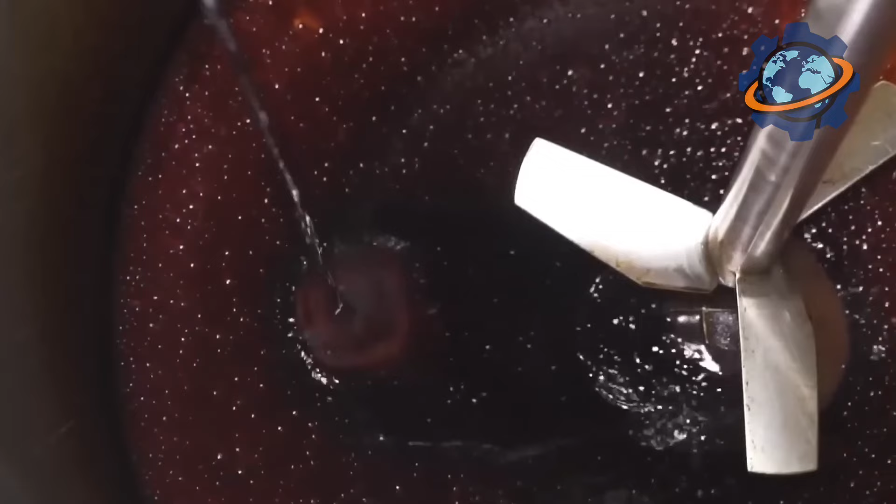For sweetness, Coca-Cola uses either high fructose corn syrup or cane sugar, depending on the region of production. In the United States, such syrup is predominantly used due to its availability and cost, while in many other countries, natural sugar from sugarcane is used. These two sweeteners have slightly different taste profiles, which affects the subtle nuances of the drink's flavor, but both provide the same sweetness that millions recognize and love.

The color of the drink is created using caramel color, which gives Coca-Cola a deep, dark brown hue. This coloring is produced using a special technology that ensures color stability and does not alter the taste properties. The tartness of the drink is provided by phosphoric acid, which also enhances the refreshing effect and gives the drink its characteristic light tang. Caffeine is another important ingredient that adds a slight bitterness and a stimulating effect to the drink.

The most mysterious component is the natural flavors, which contain a secret recipe known only to a select few company employees. This mixture of essential oils, extracts, and spices creates the recognizable aroma and taste of Coca-Cola, which is impossible to replicate exactly. It is known that the composition may include oils of lemon, orange, cinnamon, nutmeg, and other ingredients, but the exact recipe remains a trade secret.

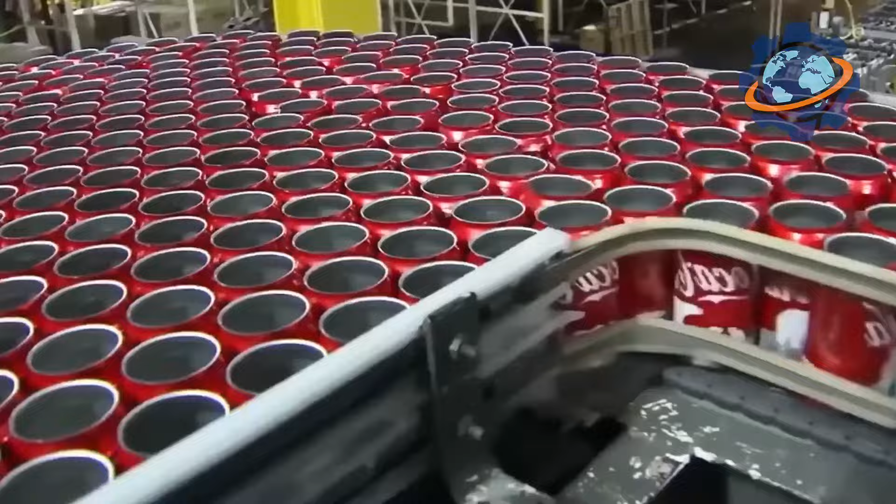In some versions of Coca-Cola, such as Coca-Cola Zero Sugar or Diet Coke, artificial sweeteners like aspartame and acesulfame potassium are used instead of sugar, which allows for reducing the calorie content of the drink without losing its taste qualities. These versions are aimed at consumers who want to reduce their sugar intake but do not want to give up their favorite taste.

Thus, the uniqueness of Coca-Cola lies in the combination of simple but carefully selected ingredients, which together create a unique taste and aroma. Each component performs its role, from refreshing carbonation to sweetness, color, acidity, and subtle aromatic notes that make this drink legendary and recognizable all over the world.

The production process of Coca-Cola is a true high-tech dance in which every step is performed with precision and care to create the legendary drink that is known and loved all over the world. Let's imagine we've entered a modern factory where the magic begins. It all starts with water, the main ingredient of the drink. Water comes from special sources and undergoes multi-stage purification.

First, it is filtered through sand, carbon, and ultrafiltration systems to remove any impurities, bacteria, and unwanted substances. Then the water is treated with ozone or ultraviolet light for additional sterilization. The result is absolutely pure, crystal clear water that meets strict international quality and safety standards.

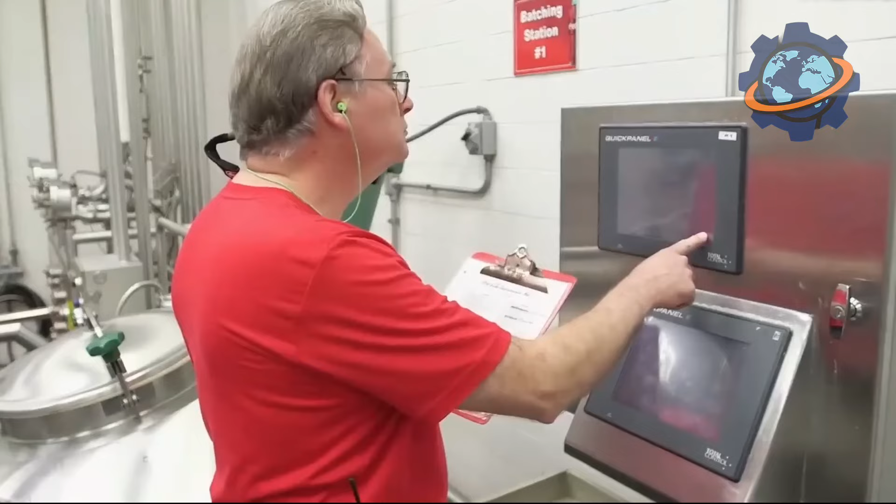In parallel, a sugar syrup is prepared. For this, sugar is dissolved in purified water in special tanks. This process takes place at a strictly controlled temperature to ensure the sugar dissolves completely and the syrup becomes homogeneous. The water for the syrup also undergoes filtration to avoid any impurities.

The next key stage is mixing the syrup with a concentrate of aromatic substances, which contains the secret Coca-Cola recipe. This mixture is added in special proportions to create the characteristic taste and aroma of the drink. The result of this stage is the so-called blending syrup, the basis of the future Coca-Cola.

Then the blending syrup is mixed with purified water and carbon dioxide in large mixing tanks. Carbon dioxide gives the drink its refreshing fizziness and a light tingling sensation that is so appreciated by consumers. The entire process takes place under strict control of pressure and temperature to ensure the ideal concentration of gas and uniform saturation of the drink.

In parallel, packaging is prepared at the factory. Empty glass or plastic bottles, as well as metal cans, undergo thorough cleaning and sterilization. The bottles are washed in special machines where water under high pressure and temperature removes any contaminants. Then they are dried and prepared for filling.

After this, the main conveyor process begins. Bottles move along belts at a speed of hundreds per minute. They are automatically filled with the finished carbonated drink through special dispensers that accurately measure the volume of each portion. After filling, the bottles are quickly sealed with caps or lids to preserve freshness and carbonation.

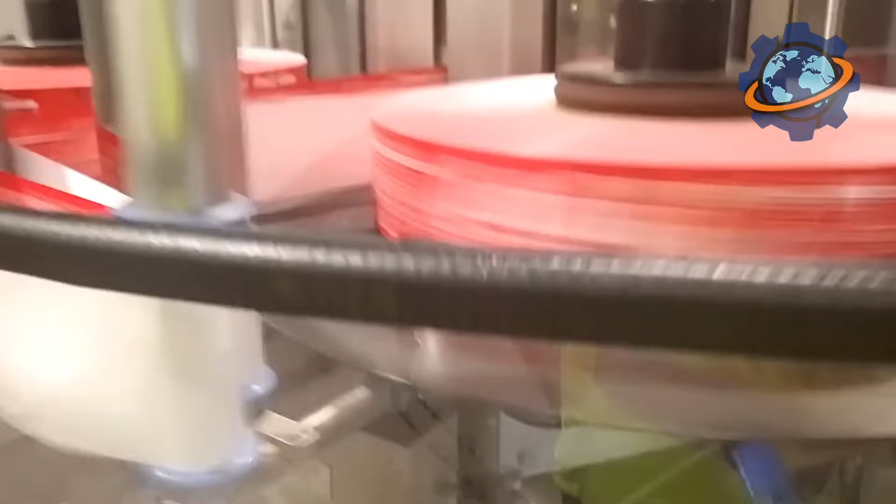Next, the bottles pass through a quality control zone, where special sensors check the fill level, seal, and absence of defects. If any deviations are detected, the bottles are automatically rejected. After this, the filled and sealed bottles move to the labeling stage. Labels with the logo, information about the composition, and expiration date are applied to them. Then the bottles are packed into cardboard boxes or plastic crates, which are convenient for transportation and storage.

The packaged products are sent to the finished goods warehouse, from where they are distributed to stores all over the world. The entire production process is accompanied by constant monitoring and quality control. The factory has numerous sensors and computer systems that track temperature, pressure, carbon dioxide concentration, equipment cleanliness, and compliance with safety standards. This ensures that every bottle of Coca-Cola meets high requirements and provides consumers with a consistently pleasant taste.

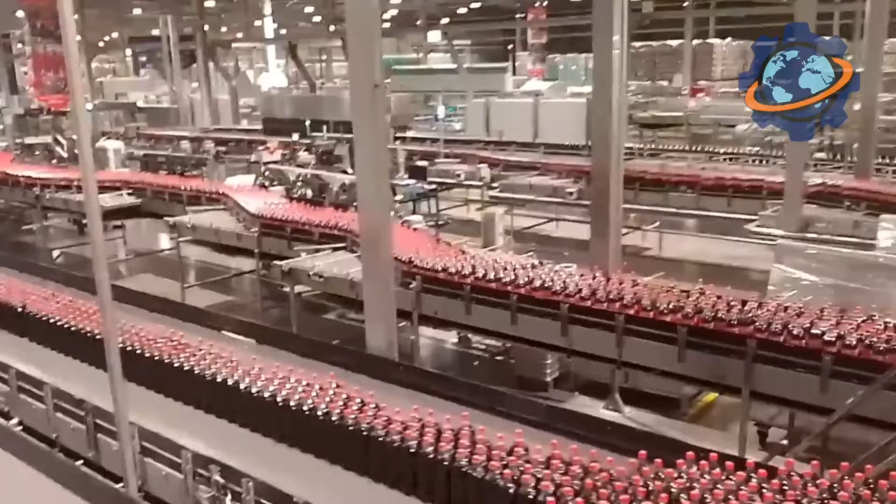So, the production of Coca-Cola is a complex and coordinated work of a large team and modern equipment, where water, sugar, a secret concentrate, and carbon dioxide are transformed into a legendary drink. Bottles and cans, as if on a magical conveyor, go through all stages from cleaning to sealing, to ultimately end up in your hands, with a fresh, sparkling, familiar taste that has been bringing joy to millions of people around the world for over a century.

In the first quarter of 2025, the Coca-Cola Company reported a net revenue of approximately $11,113 million, which is 2% less than in the same period last year. This decline was due to currency fluctuations and changes in the structure of franchising operations. At the same time, organic revenue, which takes into account internal growth without the influence of external factors, increased by 6%, indicating a successful pricing policy and a recovery in sales volumes in key regions, such as the Asia-Pacific region.

The volume of sales in the form of product units increased by 2%, which is the best indicator since the second quarter of 2024, thanks to growing demand in India, China, and Brazil. Coca-Cola remains one of the strongest global brands with a recognition index of over 90 points, ranking among the top 10 global brands in terms of value and influence. The company is actively developing markets in countries with rapid economic growth, such as India, China, and Brazil, where the demand for soft drinks is growing due to the increase in the middle class and changing consumer habits.

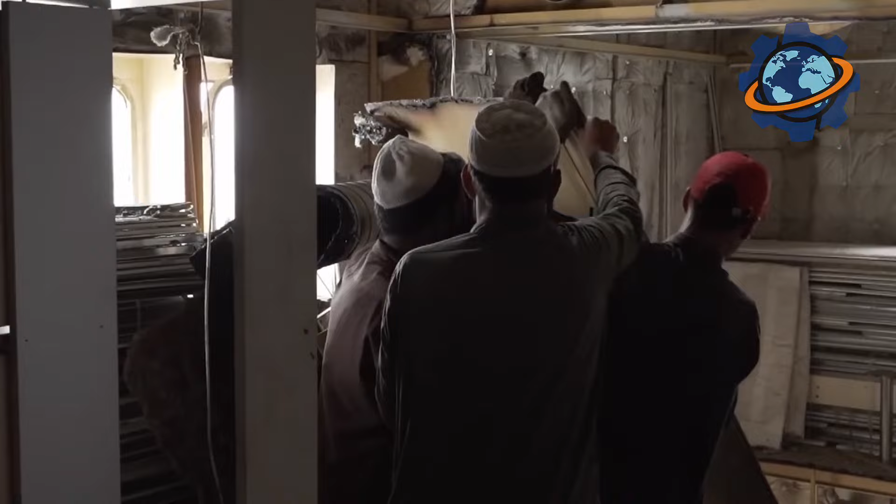Hazardous materials require special handling. Asbestos insulation wrapped every pipe in ships built before 1990. Workers in basic masks, far below Western safety standards, remove it by hand. Oil residue coats engine rooms inches thick. Fuel tanks supposedly emptied still contain deadly vapors. Last year, 17 workers died in Bangladesh yards from explosions and toxic exposure. This is dangerous work done by desperate men.

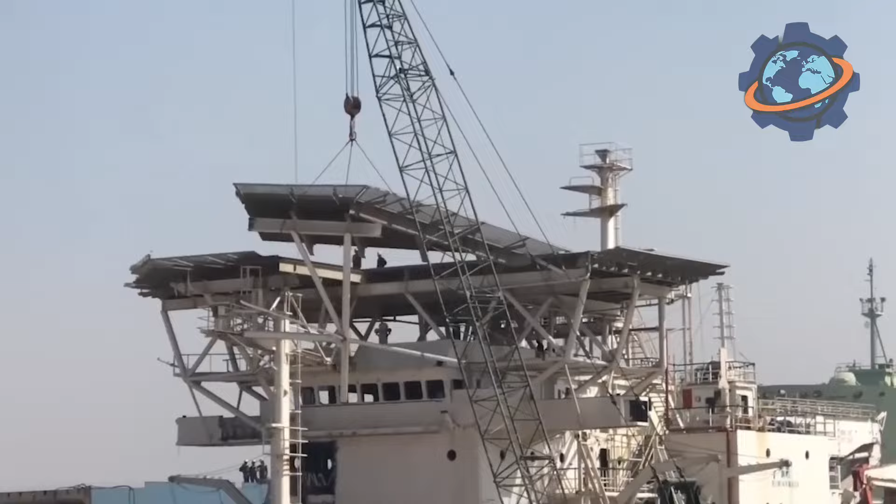The cutting begins at the bow. Workers climb scaffolding made from ship parts, wielding oxyacetylene torches, burning at 6,000 degrees. Steel glows cherry red, then separates. Chunks weighing tons crash onto beach sand, shaking ground felt hundreds of yards away.

Watch the cutter teams. They work in pairs. One torches, one watches for falling debris. No hard hats. Flip-flops instead of steel-toed boots. Yet their precision is remarkable. They know exactly where to cut, following structural blueprints memorized through years of experience. The ship tells you where it wants to break, says one veteran. Fight it, the steel wins. Work with it, you go home alive.

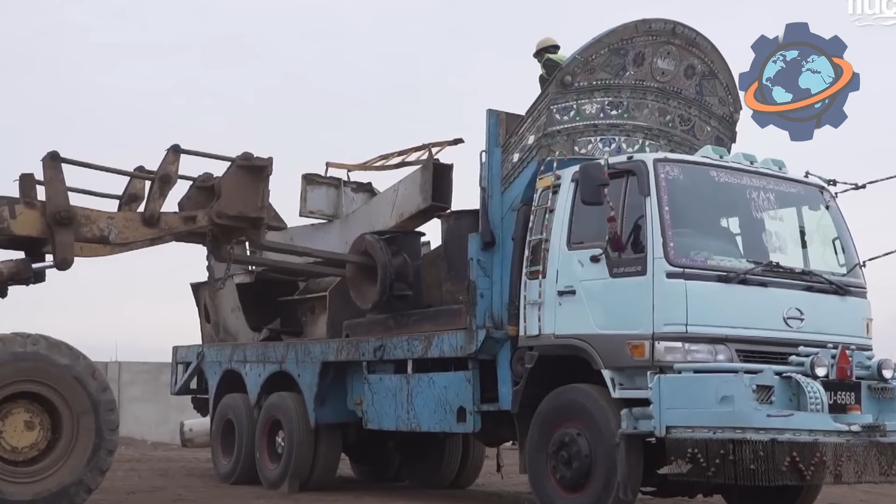Picture the economics. A scrapped container ship sells for $500 per ton. 60,000 tons equals $30 million, split between ship owner, yard owner, and workers earning $3 daily. The math seems cruel, but it's why these yards exist. No Western facility can compete with labor costs. Environmental regulations alone would triple expenses.

The engine room reveals industrial archaeology. Marine diesels the size of houses, 12 cylinders, each taller than a man, get disassembled bolt by bolt. These engines ran continuously for 30 years, burning heavy fuel oil thicker than honey. The engineering is magnificent. Crankshafts weighing 50 tons, precisely balanced to spin at 100 RPM without vibration.

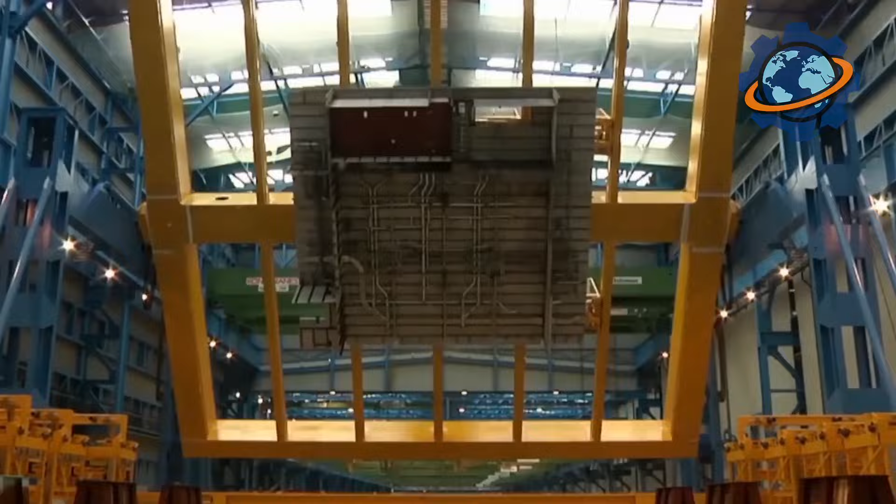This machinery doesn't get melted. It gets resold. Ship engines power factories across South Asia. Generators light villages without grid connections. Pumps irrigate farms. The secondary market for marine equipment employs thousands of traders, mechanics, and transporters. Nothing from a ship truly dies. It migrates into developing economies, extending useful life decades beyond original purpose.

Below the waterline lies the double bottom, the ship's structural spine. These compartments held ballast water, fuel reserves, sometimes cargo. Accessing them requires cutting through multiple steel layers, descending into spaces never designed for human comfort. Workers joke darkly about the belly, where heat concentrates, air thins, and escape routes disappear.

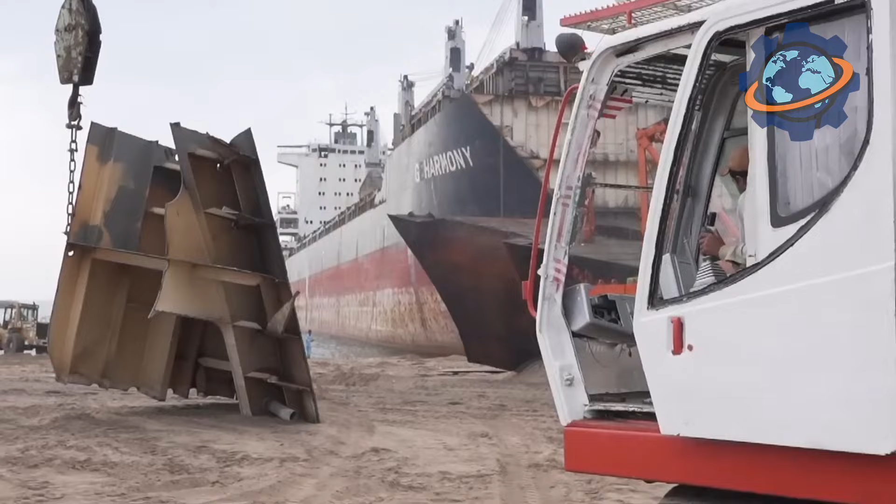Cutting the double bottom takes weeks. Each section weighs tons, but must be removed carefully. Collapse here buries workers under steel avalanches. Supervisors watch from shore, tracking progress through radio calls. When sections finally break free, cranes swing them clear while workers scatter. The beach cheers each successful lift. These small victories accumulate into complete demolition over months.

The propeller comes last and commands highest prices. Bronze propellers weighing 40 tons contain copper, aluminum, nickel, and manganese in precise alloy. Scrap value exceeds $200,000. Yards guard propellers like treasure, storing them in secured compounds until specialty metal dealers arrive.

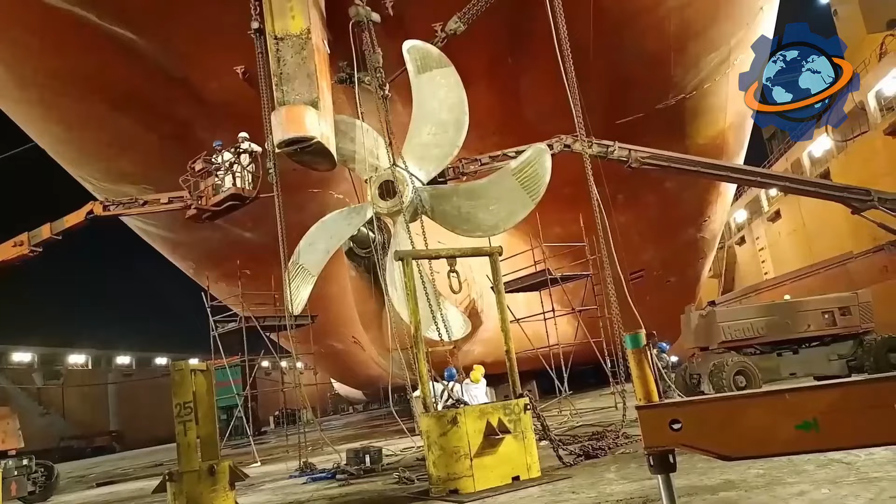Watch the propeller removal. It requires precision cutting around the shaft, then carefully lowering the massive bronze flower onto reinforced trailers. One slip damages blades worth thousands each. The journey from beach to foundry happens under armed guard. Bronze theft funds criminal operations throughout the region. When finally melted, this propeller might become electrical wiring, plumbing fixtures, or musical instruments. The ship's heartbeat transforms into civilization's nervous system.

Shipbreaking emerged from necessity after World War II. Hundreds of Liberty ships, hastily built for wartime cargo, became obsolete overnight. Scrapping them created the modern industry. Taiwan dominated through the 70s, then Korea, then China. Environmental regulations pushed the trade to South Asia by the 90s.

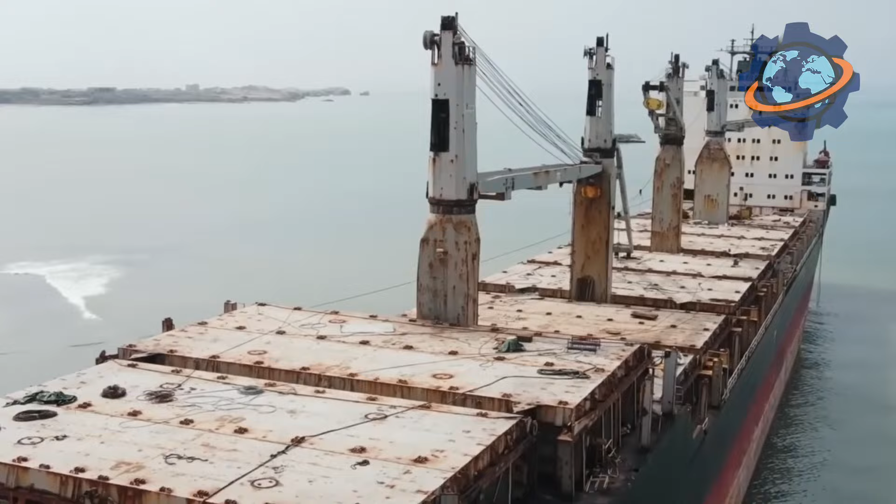Chittagong rose because geography cooperated. Extreme tidal ranges, 16 feet between high and low, create natural dry docks. Sandy beaches cushion impacts. Cheap labor, minimal regulation, and proximity to steel-hungry construction markets completed the equation. Today, Bangladesh breaks 40% of global tonnage. The industry employs over 200,000 workers directly, plus countless more in supporting trades. Love it or hate it, shipbreaking built modern Bangladesh.

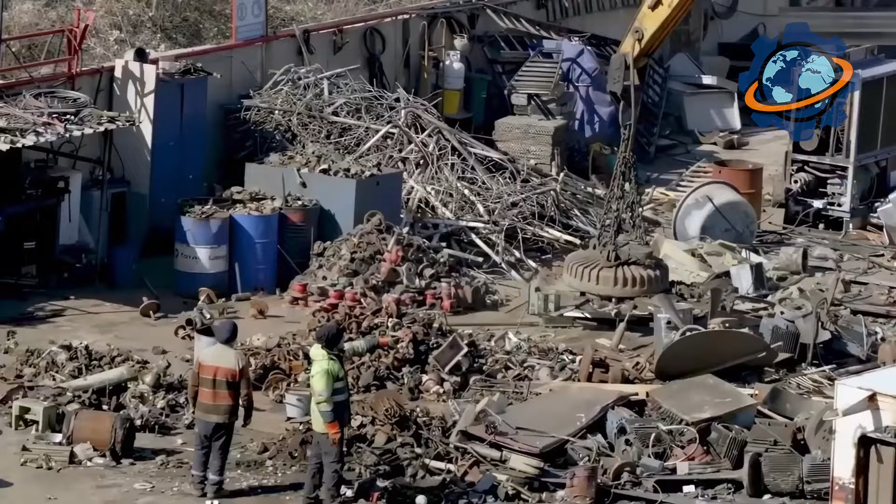Carbon emissions dropped 62% using ship-sourced steel versus virgin ore production. Industry recycles 20 million tons of steel annually, enough to build 4,000 skyscrapers. A single aircraft carrier yields enough metal for 15 apartment towers housing 50,000 people. Here's the secret we promised. That ship doesn't just get recycled, it gets reincarnated completely. 95% of every vessel finds new life.

Steel becomes rebar reinforcing buildings throughout Asia. Copper wiring powers homes. Furniture furnishes restaurants. Lifeboats become fishing vessels. Even the wooden decking becomes flooring in European boutiques, marketed as reclaimed teak at premium prices. From ocean voyager to urban infrastructure, the transformation completes. We've built an ecosystem where nothing truly disappears.

That cruise ship where honeymooners danced might now support the hospital where their grandchildren are born. The container ship carrying your television might become the bridge you drive across. Ships don't die on those beaches. They scatter into civilization, becoming the hidden skeleton of modern life. Steel ghosts supporting everything we build.

Every second, 32 tires begin service worldwide. Each survives 100,000 miles of punishment, heat, friction, road impacts before replacement. Picture mountains of rubber growing daily. 2 billion tires manufactured annually, weighing 25 million tons combined. That's every car, truck, aircraft, and bicycle on Earth demanding fresh rubber constantly.

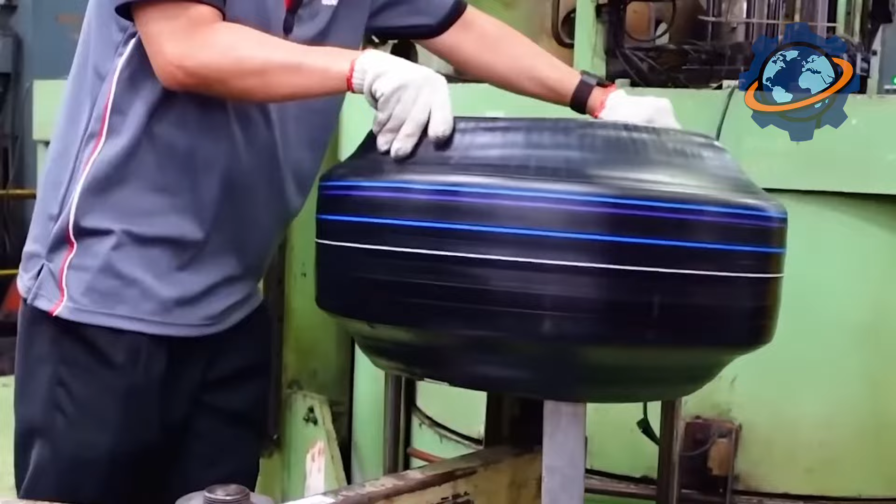How does liquid petroleum become indestructible black donuts? Why do old tires refuse to decompose for 500 years? Stick around. You'll discover the shocking chemical process transforming oil into immortal rubber and the jaw-dropping secret of where 85% of American worn tires end up. Hint? It's beneath your feet on football fields.

The story begins in Southeast Asian plantations, where rubber trees grow in geometric rows, stretching miles. Workers cut V-shaped grooves into bark, collecting milky latex sap in cups. Each tree produces 2 ounces daily, barely enough to fill shot glasses. Natural rubber comprises 30% of modern tires. The remainder uses synthetic alternatives derived from petroleum.

Massive chemical plants crack crude oil into monomers, butadiene, styrene, then polymerize them into synthetic rubber matching natural properties. These facilities process 50,000 barrels daily, transforming black liquid into white crumb rubber. The similarity is uncanny. Petroleum-based rubber exhibits elasticity, strength, and durability rivaling million-year-old tree evolution. Chemistry replicates nature in months.

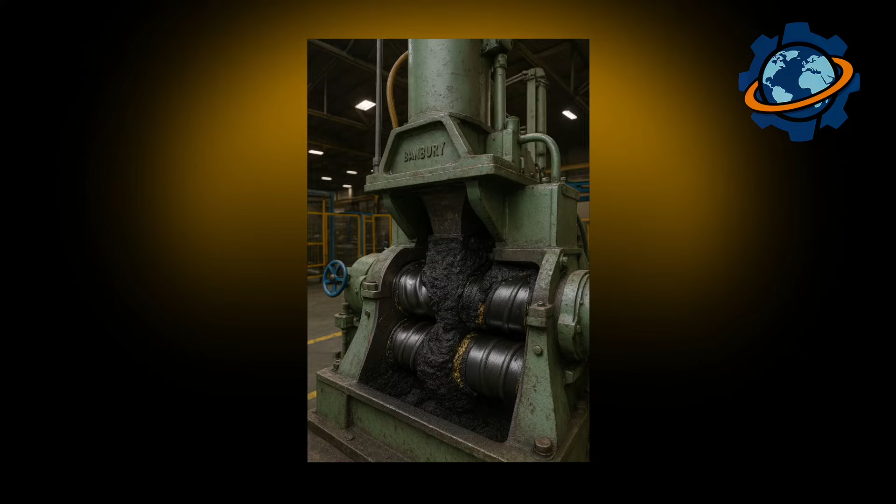Next comes compounding, the secret sauce where rubber meets additives. Industrial mixers, standing 2 stories tall with rotors spinning at 80 RPM, blend rubber with carbon black, silica, sulfur, accelerators, and antioxidants. Carbon black, basically controlled soot production, reinforces rubber while providing characteristic black color. Without it, tires would be translucent white and fail within miles.

Each tire compound contains 15 ingredients mixed in precise ratios. Tread rubber emphasizes durability. Sidewall rubber prioritizes flexibility. Inner liner uses butyl rubber for air retention. Formulations remain trade secrets. Michelin's compounds differ from Goodyear's, creating performance variations. Mixing takes 12 minutes at temperatures reaching 300 degrees Fahrenheit. The batch, weighing 500 pounds, emerges as uniform black mass ready for shaping.

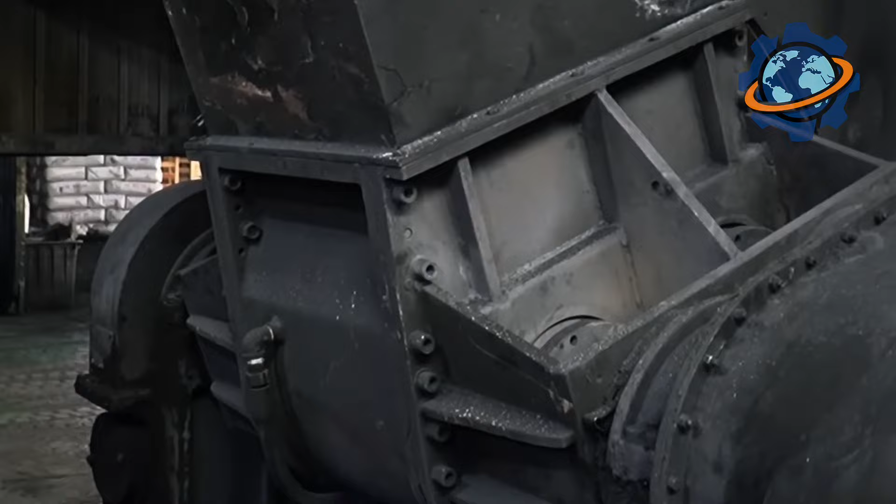Giant extruders force hot rubber through dies, creating continuous strips of tread, sidewalls, and bead filler. These machines operate like industrial Play-Doh shapers, pushing material through shaped openings at forces exceeding 2,000 psi. Tread emerges with grooves preformed. Sidewalls arrive as smooth sheets. Cooling conveyors solidify the profiles.

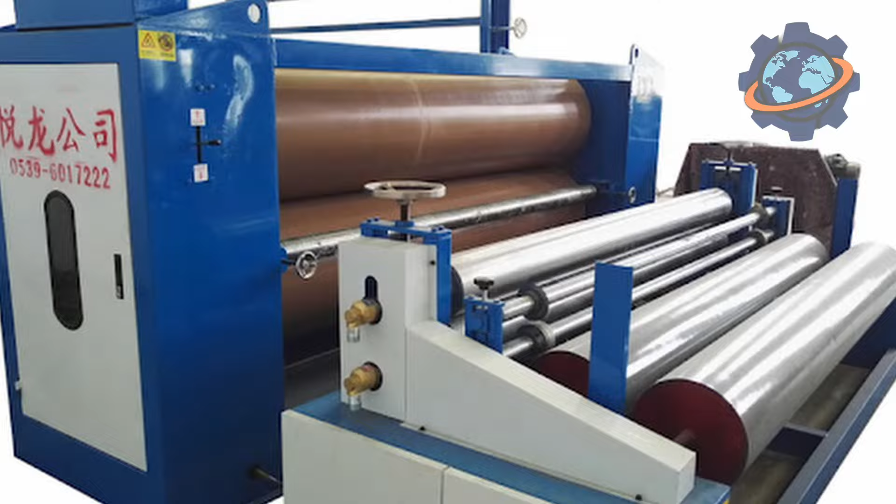Meanwhile, calendering machines squeeze rubber sheets to precise thickness, measured in thousandths of inches, coating steel cord and fabric plies. These textile layers provide structural strength. Modern radial tires contain steel belts running at 20 degrees to rotation direction, fabric plies at 90 degrees, creating cross-brace architecture. Workers cut these components into precise lengths, stockpiling thousands of parts daily for assembly lines demanding continuous supply.

Then comes tire building, robotic ballet assembling 30 components into recognizable shapes. Cylindrical drums rotate while automated arms apply inner liner, body plies, steel belts, sidewalls, and tread in programmed sequence. Each component positions within 0.05-inch tolerance. Precision matters because imbalance at highway speeds creates dangerous vibrations. The green tire, uncured assembly, looks puffy and pale, lacking final tread pattern.

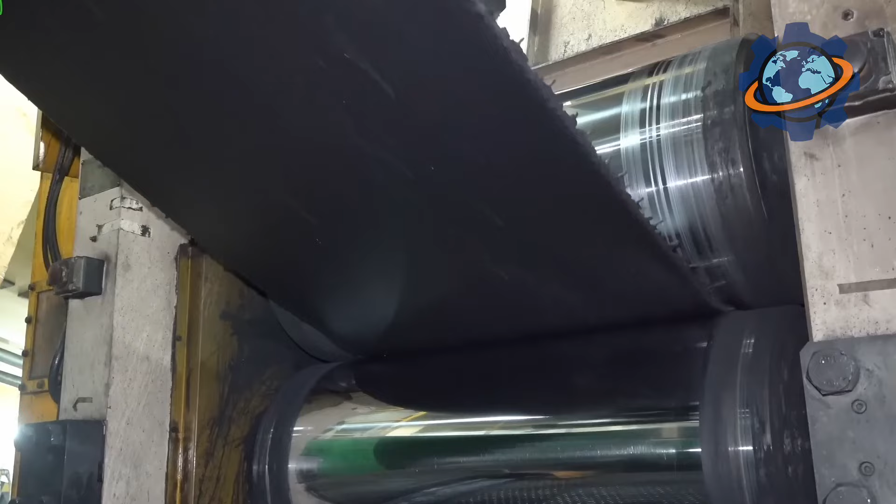Steel beads, wire bundles coated in rubber, anchor edges, providing mounting surfaces for wheel rims. These beads contain piano wire strength steel wound in continuous loops. Breaking beads requires forces exceeding 5 tons, ensuring tires never separate from rims even during blowouts. Assembly takes 3 minutes per tire on modern automated lines, producing 2,000 tires daily.

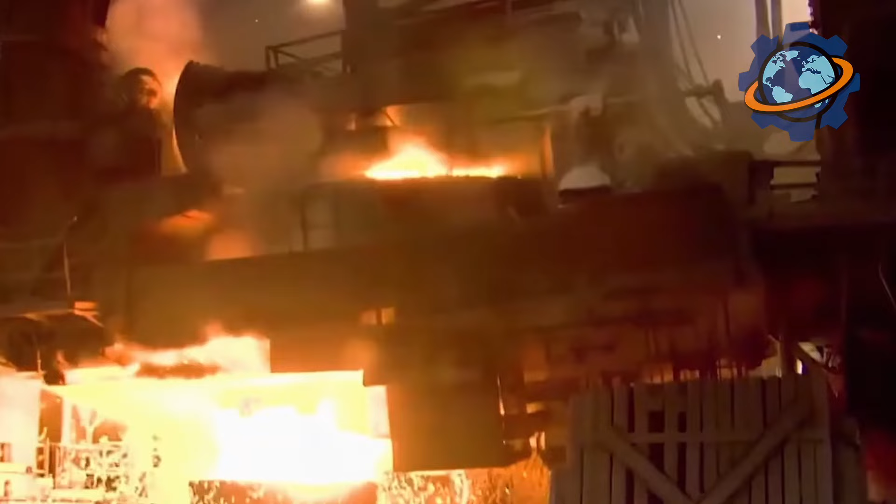Curing transforms green tires into finished products through heat, pressure, and chemistry. Massive presses, resembling medieval iron maidens, close around green tires. Internal bladders inflate with superheated steam at 350 degrees Fahrenheit and 200 psi. External mold segments, engraved with tread patterns, press inward simultaneously. This step is critical. Vulcanization.

Sulfur atoms cross-link rubber polymer chains, creating 3-dimensional molecular networks. Picture chain-link fences welded together at every intersection. That's vulcanized rubber at molecular level. The process, discovered accidentally by Charles Goodyear in 1839, transformed useless sticky material into engineering marvel. Curing takes 12 minutes. Afterward, tires emerge rigid with crisp tread patterns and permanent shape. They'll never soften or melt again. Vulcanization is irreversible.

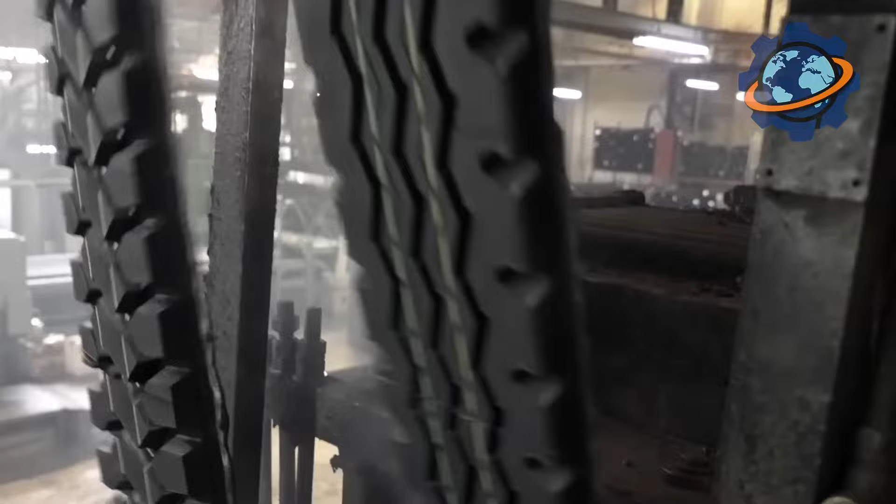After curing, quality control begins. X-ray machines scan internal structure, detecting steel belt misalignment, air pockets, or ply separations invisible externally. Uniformity machines spin tires at highway speeds, measuring force variations. Even 0.5-pound imbalance causes rejection. These tires must perform flawlessly at 120 miles per hour for tens of thousands of miles.

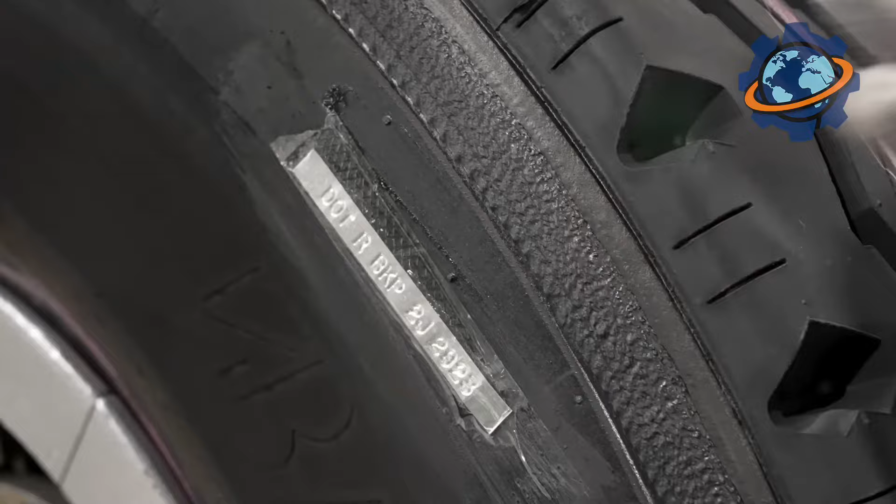Inspectors examine tread depth, sidewall finish, bead seating. DOT codes stamped into sidewalls identify manufacturing plant, date, batch number, critical for recalls. Modern tires undergo durability testing. Machines simulate 50,000 miles in 72 hours, cycling through temperature extremes, overloading, underinflation. Failure rate must stay below 0.1%.

That's one defective tire per 1,000, because tire failure at highway speeds kills people. Performance testing pushes limits beyond consumer use. Test drivers race prototype tires on proving grounds, executing emergency maneuvers, sustained high-speed runs, extreme weather conditions. Sensors measure temperatures, pressures, wear rates. Data feeds computer simulations refining compounds and construction.

Winter tires use softer compounds, remaining flexible below freezing. Summer tires employ harder rubber, resisting heat degradation. All-season compromises performance for year-round versatility. Racing slicks sacrifice tread patterns for maximum contact area. Professional race tires last 200 miles but provide grip exceeding street tires tenfold.

Tire engineering optimizes contradictory requirements: durability versus performance, comfort versus handling, cost versus longevity. Every design represents compromises, balancing physics against economics. This technology evolved from crude beginnings. Ancient Mesoamericans harvested rubber for balls and waterproofing 3,000 years ago, but material degraded rapidly.

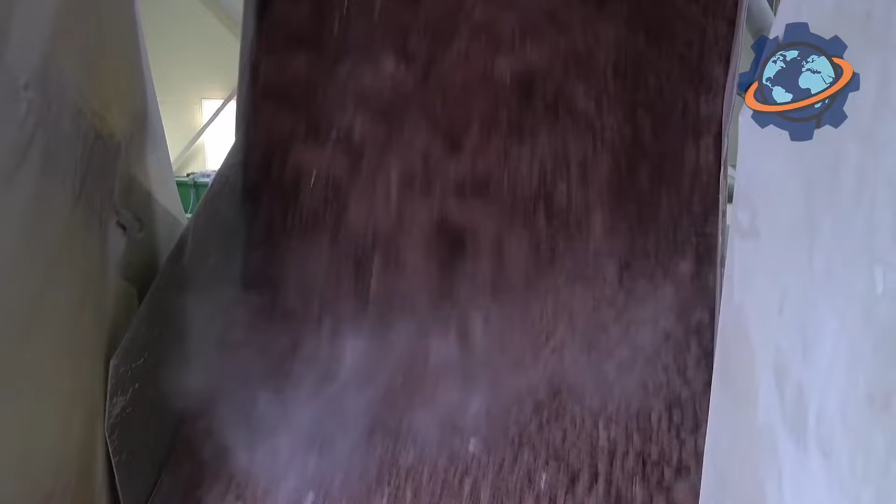Charles Goodyear's 1839 vulcanization discovery changed everything. Accidentally dropping a rubber-sulfur mixture on a hot stove created heat-stable material. The pneumatic tire emerged in 1888 when John Dunlop invented air-filled rubber tires for his son's tricycle. That innovation enabled the automobile revolution. Cars needed shock absorption only inflatable rubber provided.

Radial tire construction, invented by Michelin in 1946, improved durability 50% over bias ply designs. Today's run-flat tires, self-sealing compounds, and airless prototypes continue the evolution. Annual global production exceeds 2 billion units, creating a waste management crisis demanding solutions.

Carbon emissions drop by 62% using recycled tire crumb versus virgin rubber production. Industry saves over $41 billion annually through tire recycling. Processing old tires into crumb costs 70% less than manufacturing new rubber from petroleum. So here's the secret. 85% of American-worn tires avoid landfills through recycling programs.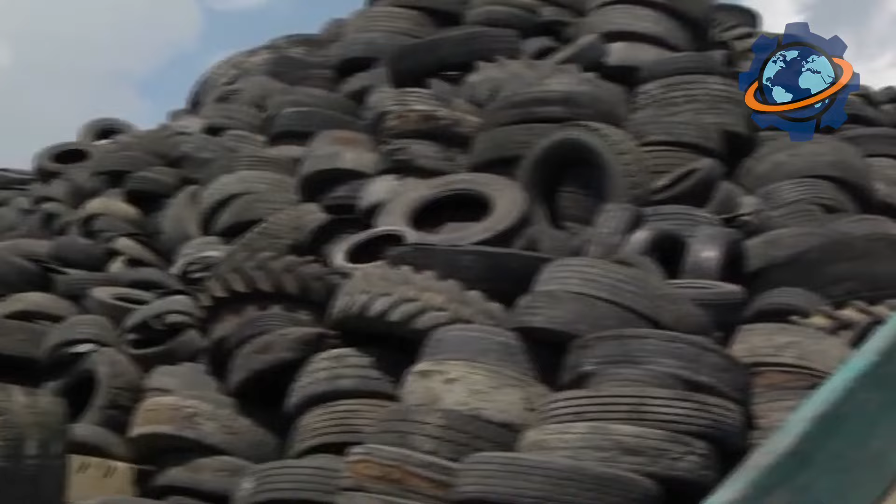Shredders reduce tires to fingernail-sized crumb. This material becomes artificial turf infill, those black granules beneath football field grass that cushion impacts and improve drainage. Schools, parks, and stadiums nationwide walk on recycled tires daily without knowing. Crumb rubber also creates playground surfaces, running tracks, asphalt modifiers, improving road durability 20%.

From petroleum to pavement to playing fields, the cycle completes. Tires never die. They transform. That indestructible black donut refusing decomposition becomes humanity's accidental gift to the circular economy. We've learned that immortal materials demand eternal responsibility.

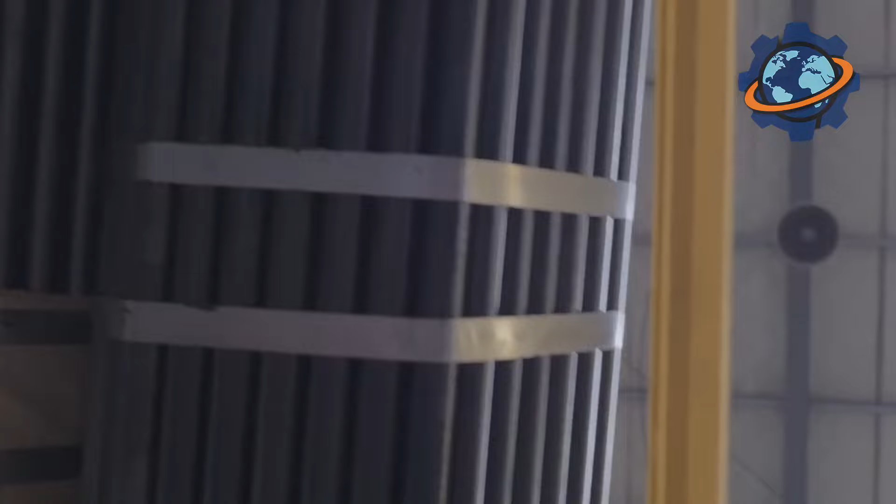How do fiery rivers of molten metal at 3,600 degrees emerge from red ore in city-sized quarries? You'll see explosions in quarries, blast furnaces as tall as 30-story buildings, converters where oxygen turns pig iron into steel in minutes, and rolling mills where 1,000-ton slabs get rolled into paper-thin sheets. Watch to the end. The finale shows why iron holds the world together. This is the story of the metal that built civilization.

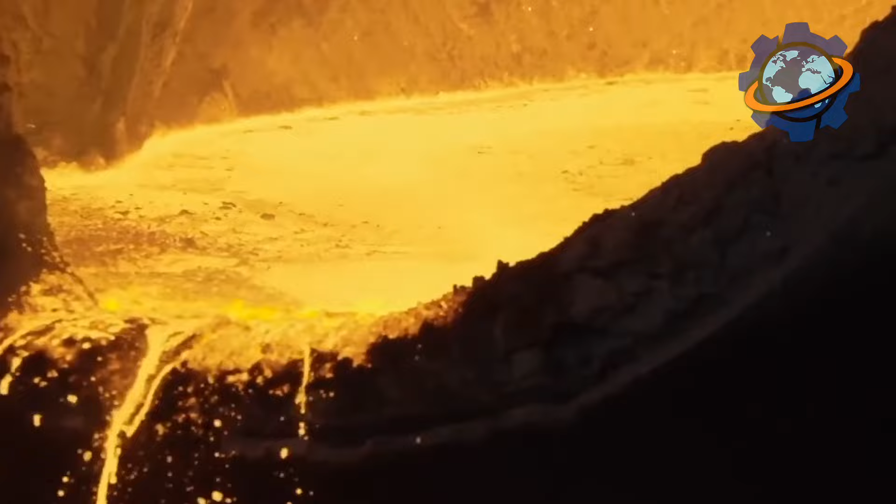The Lebedinsky Quarry in Russia is one of the planet's largest iron ore quarries. Depth, nearly 2,000 feet. Width, 3 miles. From the edge, you can't see the bottom. A gigantic wound in the earth from which 100,000 tons of iron ore are extracted daily. Excavators as tall as 10-story buildings scoop rock with buckets holding 1,800 cubic feet. One bucket is like a small house.

Dump trucks with 360-ton capacity haul ore up the spiral road. Wheels taller than a person. But before loading the ore, it needs to be blasted. Drilling rigs create holes 65 feet deep. Tons of ammonium nitrate explosive are packed into these holes. The explosion? Earth trembles. A wall of rock tall as a skyscraper crashes down. A dust cloud rises 3,000 feet.

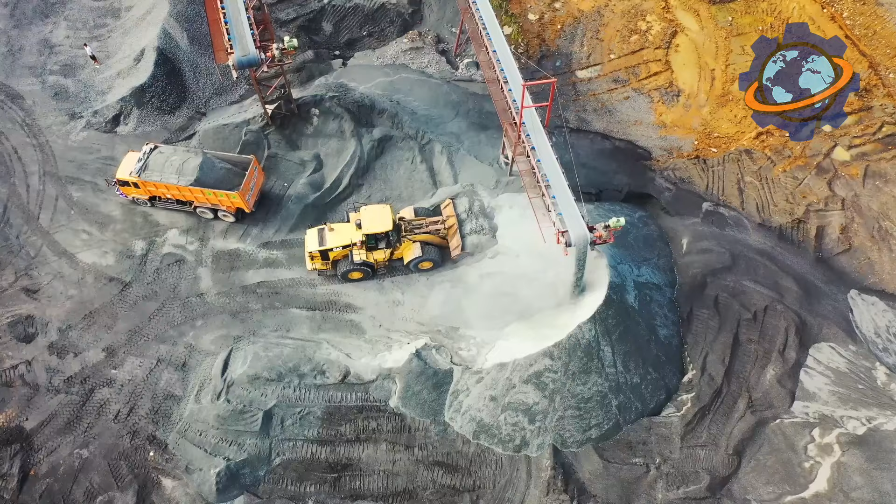After the dust settles, excavators begin work. The ore is reddish-brown, sometimes almost black. Magnetite and hematite, iron oxides. Iron content ranges from 30 to 60%. The rest is waste rock. The ore goes to a processing plant. Massive cone crushers grind bus-sized chunks. The noise can be heard for miles.

Ore gets crushed to fist size, then to gravel, then smaller. It enters ball mills, steel drums 20 feet in diameter, 33 feet long. Inside are hundreds of tons of steel balls. The drum rotates, balls drop, grinding ore into fine powder. After 8 hours of grinding, you get reddish-brown dust. It's mixed with water, creating pulp, a liquid slurry.

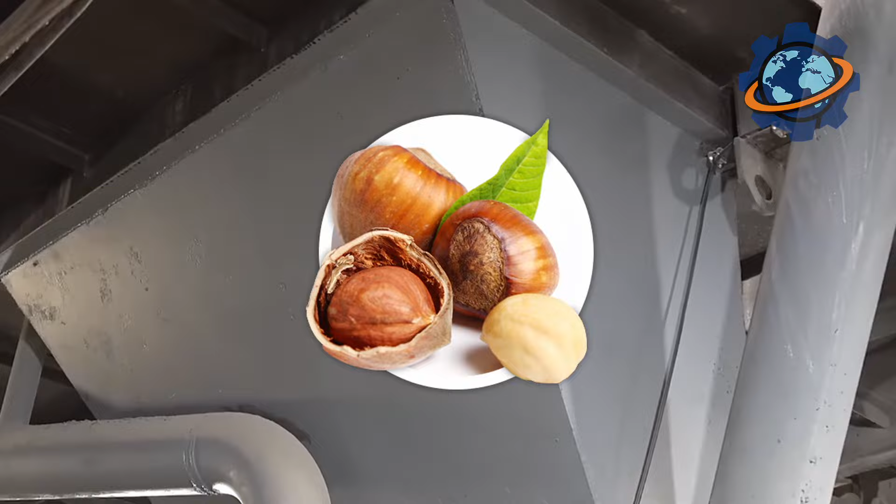This slurry passes through magnetic separators. Magnetite sticks to magnetic drums. Waste rock washes away. The concentrate contains 65 to 70% iron. From this, they make pellets, granules the size of hazelnuts. Wet concentrate gets rolled into balls on special drums, then fired at 2,400 degrees Fahrenheit.

Pellets harden, becoming rock solid. These pellets are raw material for blast furnaces. Each plant produces millions of tons of pellets yearly. They're loaded onto trains and shipped to steel mills.

A blast furnace is a steel tower 330 feet tall, 46 feet in diameter. 30 stories of pure metal and fire. Lined inside with 3-foot-thick fireproof brick. Internal volume, 176,000 cubic feet. Iron ore pellets, coke, and fluxes like limestone or dolomite are loaded from the top, in layers, like a layered cake. Several hundred tons at a time.

From below, through tuyères, openings in the walls, hot air is blown in. Air temperature, 2,200 degrees Fahrenheit. Pressure, 4 atmospheres. Coke ignites. Temperature in the furnace's lower section reaches 3,600 degrees Fahrenheit. Pellets slowly descend, heating up. Different reactions occur at different heights. First, moisture leaves the ore.

Then, at 930 degrees, iron oxide reduction begins. Carbon from coke strips away oxygen. At 1800 degrees, ore becomes spongy iron. At 2700 degrees, iron melts. Drops of molten metal flow down. At the furnace bottom, molten pig iron accumulates, an iron alloy with 4% carbon. Pig iron temperature at the furnace bottom is 2,700 degrees Fahrenheit. It glows blindingly white with an orange tint.

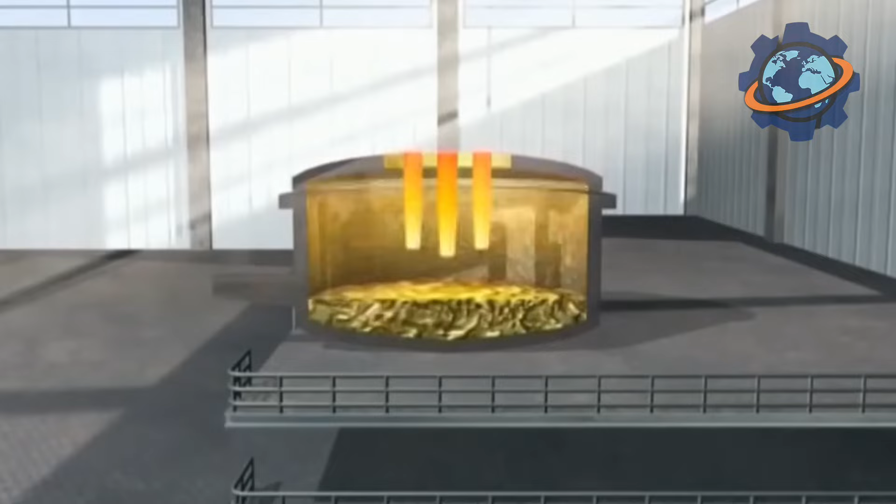Pig iron is denser than slag, so it stays at the bottom. Slag, molten impurities and fluxes, floats on top. Every 4 hours, they open the tap hole, an opening in the furnace's sidewall. Pig iron tapping is a fire show. A stream of molten metal flows down channels. Sparks fly dozens of feet. The brightness requires dark glasses to watch.

Pig iron flows into massive ladles on railroad cars. One ladle holds 300 tons. It's a locomotive made of molten metal. The ladle gets covered to prevent cooling and shipped to the steelmaking shop. One blast furnace operates continuously for years. Stopping is catastrophic. Metal would solidify inside. The furnace produces 10,000 tons of pig iron daily. That's like 100 railroad cars. Major steel mills have 10 to 15 blast furnaces.

But pig iron isn't steel yet. It's brittle due to high carbon content. Steel is needed, an alloy with less than 2% carbon. Pig iron gets poured into a converter, a massive pear-shaped vessel 33 feet tall, lined with fireproof brick. It holds 350 tons of molten metal. The converter tilts, pig iron pours in, steel scrap is added for cooling. The converter returns to vertical position.

An oxygen lance, a tube 20 inches in diameter, lowers from above. Oxygen flow begins. A jet of pure oxygen at 150 pounds per square inch pressure strikes the molten metal. Violent reaction begins. Oxygen oxidizes carbon, silicon, manganese, impurities in pig iron. These exothermic reactions release enormous heat. Temperature rockets to 3,200 degrees Fahrenheit.

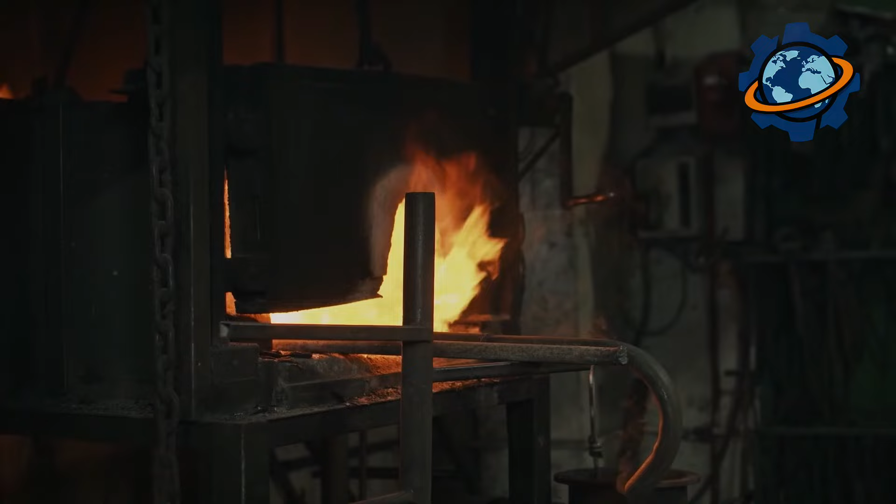Metal boils and churns. Flame tongues several feet high shoot from the converter mouth. Sparks and molten drops fly everywhere. The blowing process takes 20 minutes. In this time, 350 tons of pig iron become steel. Carbon burns down to 1% or less. The converter tilts, steel pours into a ladle. The molten metal glows blindingly white at 2,900 degrees Fahrenheit.

Alloying elements get added to the ladle. Manganese, chromium, nickel, molybdenum, depending on the steel grade needed. They mix it by blowing argon through. Then steel gets cast. There are 2 methods. First, continuous casting. Molten metal pours into a crystallizer, a water-cooled copper mold. Below, a solidifying blank emerges, a slab 8 inches thick, 6.5 feet wide. It glows red, surface temperature around 1,800 degrees Fahrenheit.

Gas cutters slice the slab into 33-foot lengths. One slab weighs 25 tons. Second method, casting into ingot molds. Steel forms. This creates ingots up to 50 tons. These ingots and slabs are semi-finished products. They go to rolling mills. There begins the final transformation, turning thick blanks into thin sheets, rails, or beams.

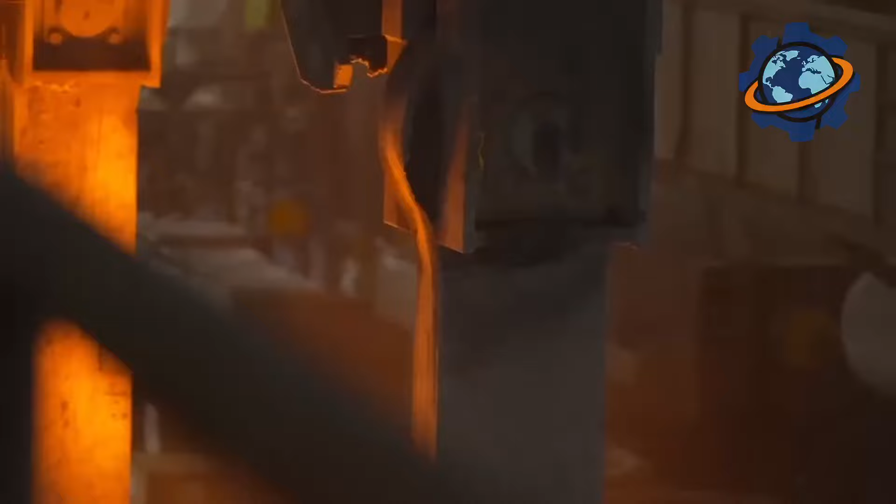Slabs heat in reheating furnaces to 2,200 degrees Fahrenheit, red hot. Then they go to the rolling mill. It's a line of dozens of rolls. Steel cylinders 3 feet in diameter weighing dozens of tons. Rolls rotate toward each other. The red-hot slab enters between rolls. They squeeze and roll it. The slab gets thinner and longer. It passes through the next pair of rolls, even thinner, dozens of times.

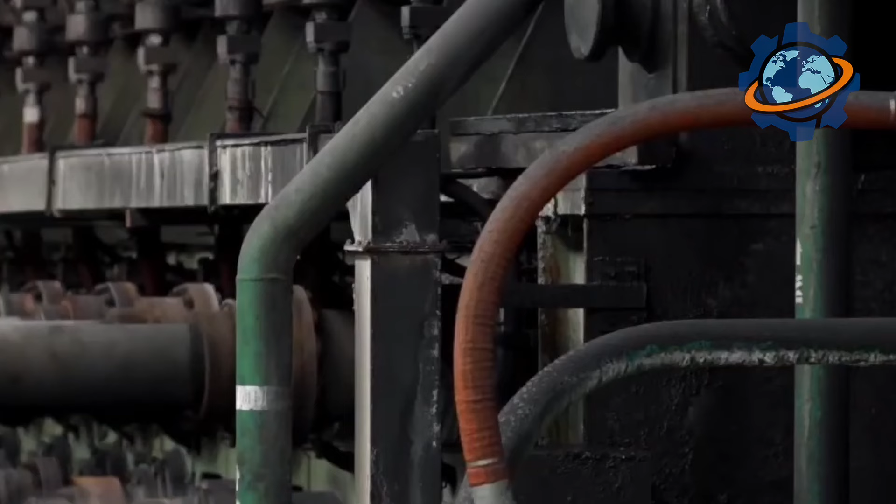An 8-inch thick slab becomes a sheet 1 to 2 millimeters thick. Length grows from 33 feet to over half a mile. Rolling speed on finishing mills reaches 50 miles per hour. Red-hot steel ribbon flies through the mill, sparks flying everywhere. Temperature drops to 1,400 degrees Fahrenheit, metal darkens. The strip cools with water, winds into giant coils weighing 20 to 30 tons. This is hot-rolled steel, the foundation for car bodies, appliance housings, building structures.

Global steel production is 2 billion tons yearly. China produces over 1 billion tons, half the world's output. India, Japan, the US, Russia are other major producers. Steel is infrastructure's backbone.

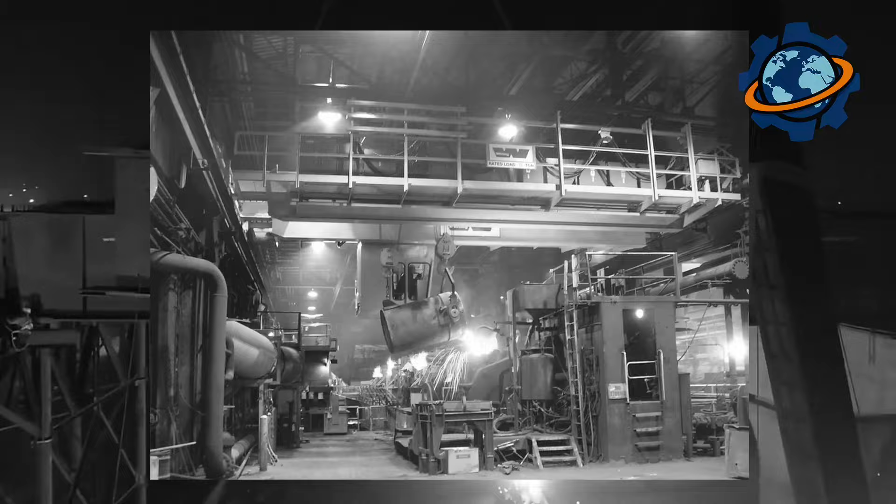95% of metal structures are steel, from skyscrapers to tin cans, from tankers to paper clips. Iron and steel are civilization's skeleton. Iron is the oldest metal after copper and bronze. The Iron Age began 3,000 years ago. First, iron came from meteorites, ready-made metal fallen from the sky. Egyptian pharaoh Tutankhamun was buried with a meteorite iron dagger.

Smelting iron from ore was learned by Hittites in Asia Minor around 1200 BC. They kept the secret for centuries, but technology spread. Iron weapons were stronger than bronze. Iron plows worked soil better than wooden ones. Civilizations with iron defeated civilizations without iron.

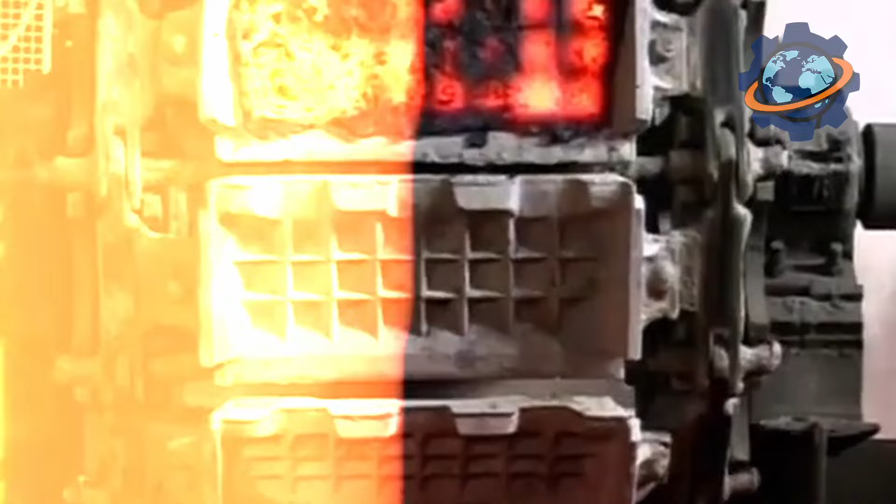Medieval times, iron was made in small furnaces. The Industrial Revolution began with blast furnace invention in the 18th century. Early furnaces used charcoal. Later, they switched to coke from coal. The 19th century brought the converter process, rapid pig iron to steel conversion. Bessemer, Martin, Thomas, names that changed the world. The 20th century was steel century. Skyscrapers, bridges, ships, automobiles. Without steel, there'd be no modern world.

And so, traveling from explosions and 2,000-foot-deep quarries through giant crushers and magnetic separators, through 300-foot-tall blast furnaces at 3,600 degrees and converters where oxygen burns out carbon in 20 minutes, through rolling mills where 8-inch slabs become millimeter-thin sheets, steel emerges, the metal that built civilization.

From nails to bridges, from paper clips to skyscrapers, iron holds the world together. Without iron, humanity would collapse back to the Stone Age. No machines, no electricity, no internet. Everything's built on iron. From fiery rivers of molten pig iron in blast furnaces to steel beams holding up skyscrapers, iron is the foundation, the base, civilization's skeleton. Metal of the gods that became metal of the masses. The most abundant, most important, most irreplaceable. Iron, the metal that holds the planet together.

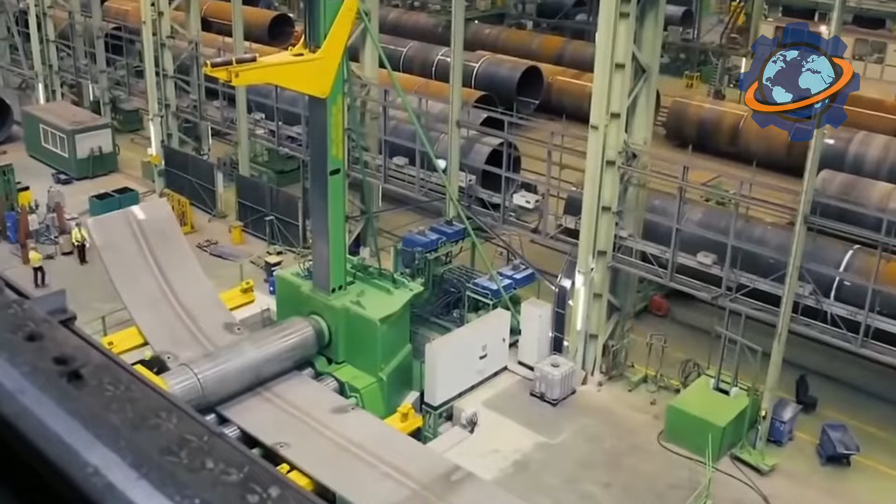Every day, somewhere in China, a machine generates force equivalent to stacking 200 fully loaded aircraft carriers vertically. This hydraulic press, rated at 80,000 tons, stands 10 stories tall and weighs more than the Eiffel Tower. Picture this. Under its ram, 300-ton steel billets, weight of 60 elephants, flatten like modeling clay in seconds. The ground shakes for miles when it operates. Windows rattle in villages 8 miles distant.

How does humanity create machines powerful enough to reshape mountains of metal? Why did Cold War superpowers race to build ever larger presses? Stick around till the end. You'll discover the jaw-dropping reason these monster machines dominate aerospace and defense, the shocking physics of what happens when 80,000 tons compress glowing steel, and why welding became obsolete for the world's most critical components.

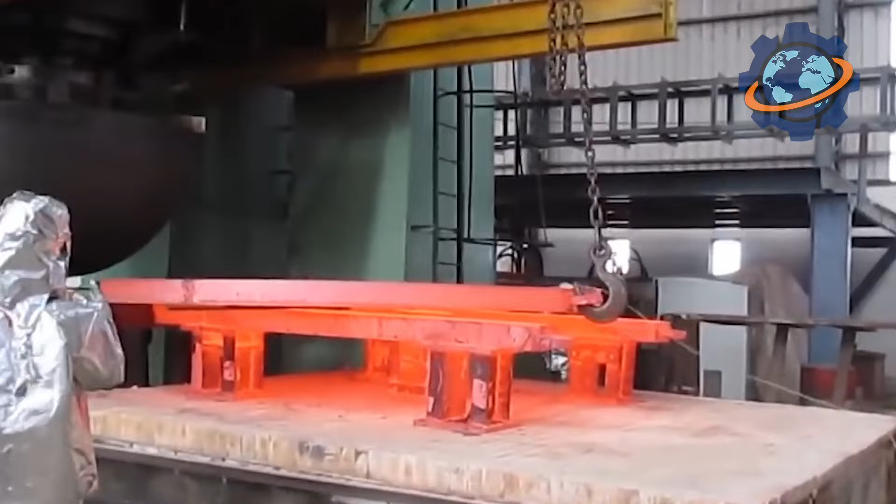The story begins at China Erzhong Group in Deyang, Sichuan Province, home to the world's most powerful forging press. This colossal machine, commissioned in 2013, towers 120 feet tall. Picture a 12-story building dedicated to squashing metal. The press frame alone weighs 22,000 tons, constructed from steel beams thicker than telephone poles, bolted together with fasteners weighing 500 pounds each. The facility consumes electricity equivalent to 40,000 homes during operation.

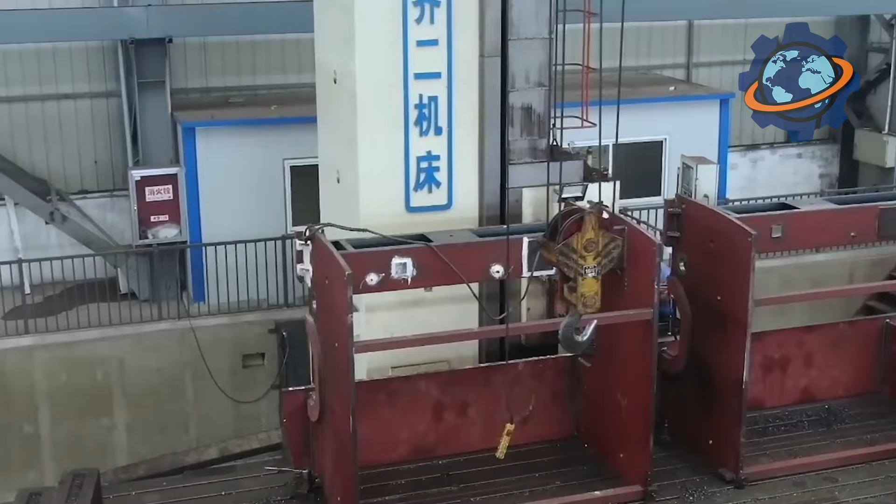8 separate hydraulic power units, each the size of shipping containers, pump oil through pipes 16 inches in diameter. These hydraulic systems generate pressures reaching 10,000 psi, enough to blast water through concrete like tissue paper. When all systems activate simultaneously, the combined oil flow measures 3,000 gallons per minute. That's emptying a backyard swimming pool every 10 minutes continuously through hydraulic cylinders generating incomprehensible force.

Next comes the press bed, a foundation descending 60 feet below ground level, deeper than 6-story buildings are tall. This isn't merely concrete, it's a geological anchor. Engineers excavated solid bedrock, then poured 8,000 cubic yards of reinforced concrete mixed with steel rebar, forming 3-dimensional cages. The foundation weighs 45,000 tons, more than 4 nuclear submarines combined.

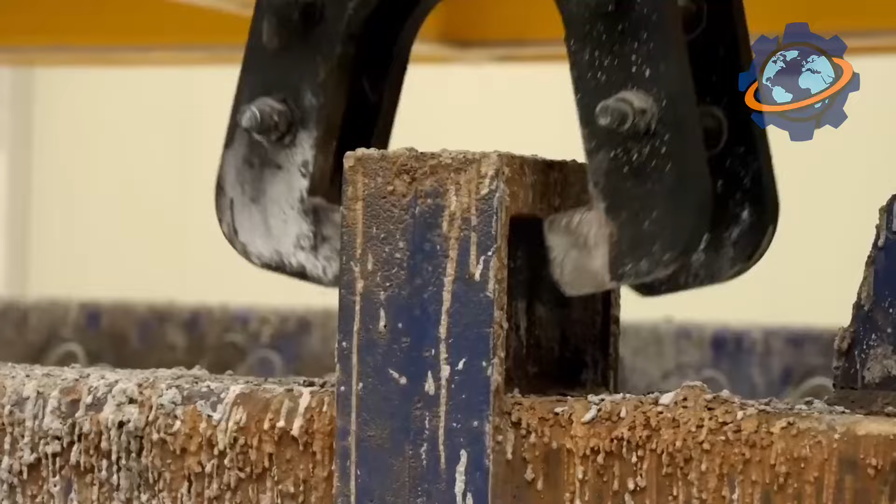Why such extreme engineering? Because when 80,000 tons of force compress metal, Newton's third law demands equal reaction force pushing downward. Without this massive foundation, the press would crack bedrock and sink into earth like a nail hammered into butter. Seismographs detect vibrations from press operations 12 miles away, not from noise, but from actual ground displacement. The Chinese government prohibited residential construction within 2-mile radius specifically because repeated press cycles could damage building foundations through accumulated seismic stress over years.

Giant overhead cranes, rated at 600 tons capacity and spanning widths exceeding football field lengths, position workpieces beneath the ram. These cranes represent engineering marvels themselves, structures where every rivet matters because failure means dropping cargo worth millions.

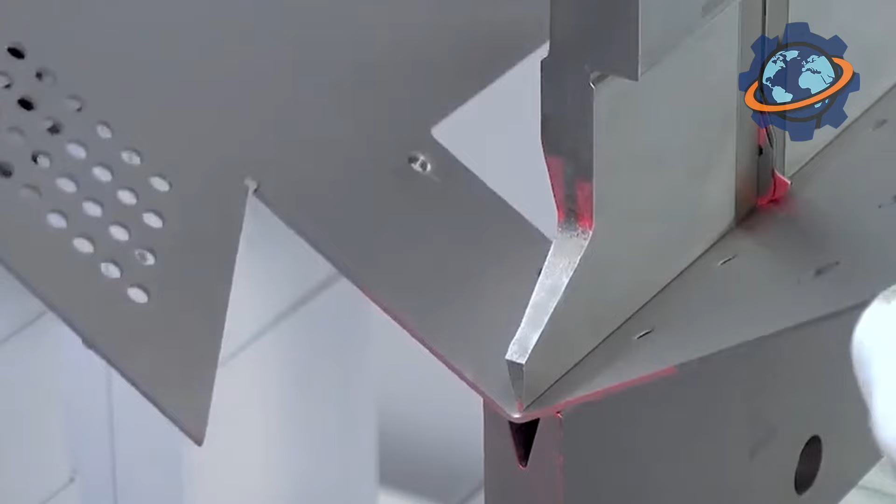Control rooms, protected by 18-inch thick reinforced concrete walls and bulletproof glass windows, house operators controlling machinery from safe distances. The press ram, the actual crushing surface, measures 40 feet by 30 feet, larger than most studio apartments. Made from tool steel hardened to withstand pressures that would pulverize normal steel, this ram surface gets replaced every 18

months despite costing $2 million. Replacing it requires 3 weeks of round-the-clock work using specialized welding techniques and stress relief treatments. Even with hardened steel, repeated impacts against 300-ton billets create microscopic cracks propagating until failure becomes inevitable.

Now comes forging, industrial violence at physics-defying scales. Workers heat steel billets to 2,400 degrees Fahrenheit in furnaces consuming natural gas at rates measured in tons per hour. At these temperatures, steel glows brilliant orange and becomes plastic, deformable under pressure but not liquid. Picture clay that weighs more than locomotives and requires forces exceeding aircraft carrier displacement to reshape.

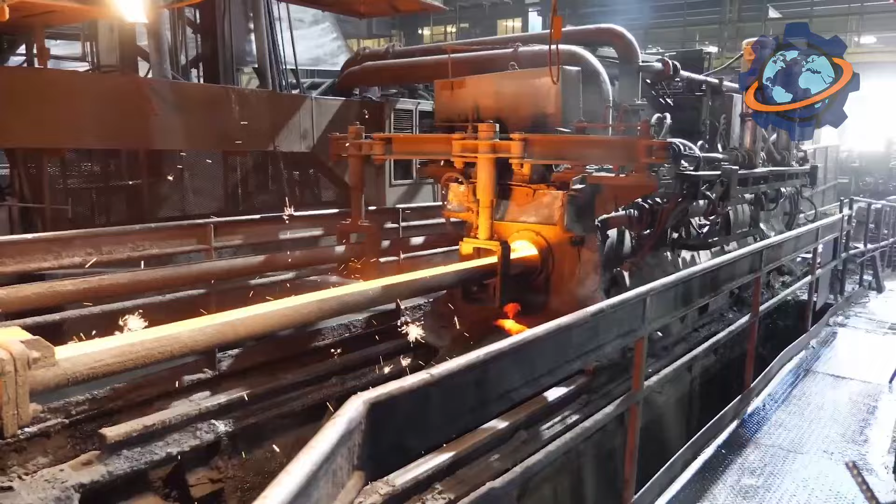Overhead cranes lower glowing billets onto the press bed with precision measured in inches, despite handling weights where inches of error cause catastrophic collisions. The ram descends at speeds reaching 20 inches per minute. Sounds slow until you realize 80,000 tons moving at any speed generates momentum requiring precise hydraulic control. One malfunction, one stuck valve, one pressure spike, and the ram becomes an uncontrollable projectile carrying enough energy to demolish the entire facility. The compression itself defies description.

As the ram contacts glowing steel, metal begins flowing, literally flowing despite being solid. Under 80,000 tons of pressure, crystal structures collapse and reorganize. Grains elongate perpendicular to compression direction, creating oriented microstructures impossible to achieve through casting. The billet spreads outward, metal squeezing into die cavities with force sufficient to emboss details smaller than human hair thickness.

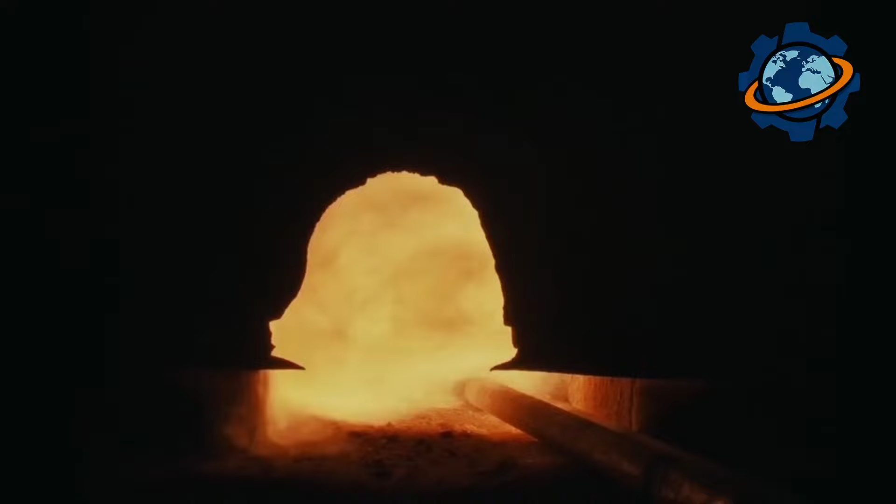This step is critical because forging aligns crystal boundaries, eliminates porosity, and creates grain flow patterns following component geometry. Cast parts contain random crystal orientations and microscopic voids. Forged parts exhibit continuous crystal structures and zero internal defects. That's the difference between components failing under stress versus components exceeding design specifications.

Hydraulic systems monitor pressure continuously. Deviations exceeding 1% trigger automatic shutdown, because overpressure shatters dies costing millions, while underpressure produces weak forgings requiring scrapping. After initial compression, the workpiece requires reheating and multiple press cycles. Large forgings need 20 to 40 separate compressions, each reshaping metal incrementally.

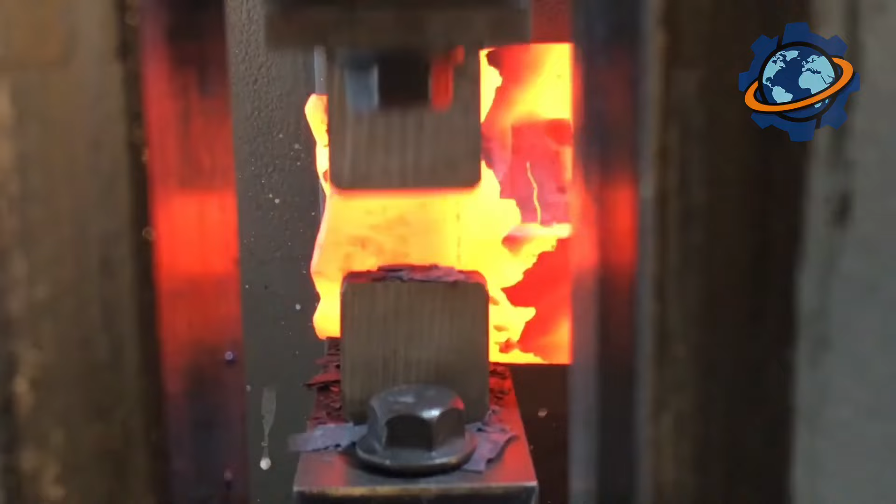Between cycles, manipulators, robotic arms capable of rotating 300-ton workpieces, reposition the forging. These manipulators exert forces exceeding 500 tons merely to rotate incandescent metal safely. Picture this: the forging process for a single large component spans 2 weeks. Workers cycle the workpiece between furnace and press 40 times, gradually transforming a rectangular billet into complex shapes: bulkheads for aircraft fuselages, rocket motor casings, pressure vessel heads.

Each press cycle compresses the forging 3 to 6 inches, permanently deforming metal through controlled violence. Temperature control matters critically. Too hot, metal oxidizes excessively. Too cold, it cracks under pressure. Operators monitor color constantly, making decisions affecting millions in material value based on visual assessment of orange to red glow transitions.

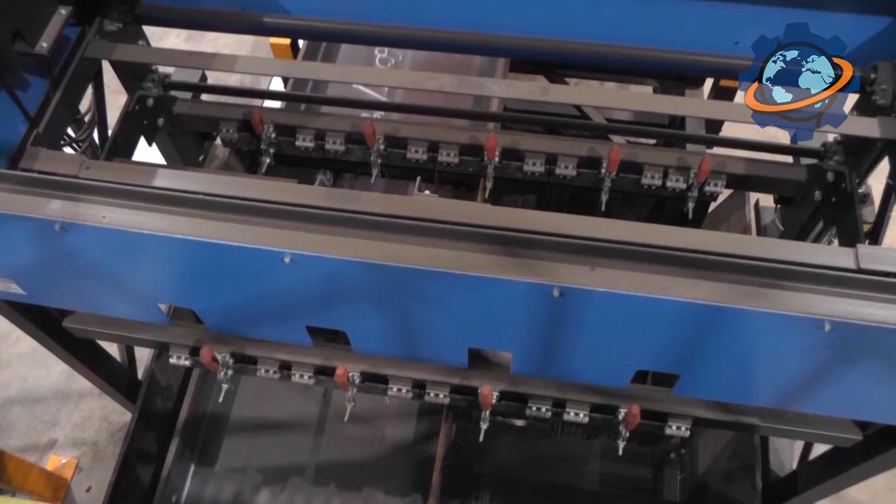Quality control begins before forging even starts. Ultrasonic inspection systems scan billets, searching for internal defects invisible to naked eyes. Even microscopic inclusions, slag particles, oxide stringers, sulfide formations, become stress concentrators, causing catastrophic failure in finished components. Rejected billets return to steel mills for remelting.

After forging, dimensional inspection using laser scanning creates three-dimensional models accurate to thousandths of inches across components 30 feet long. Metallurgical testing cuts samples from forging edges, examining grain structure through electron microscopy. Grain size, orientation, boundary spacing, all must meet specifications tighter than semiconductor manufacturing tolerances.

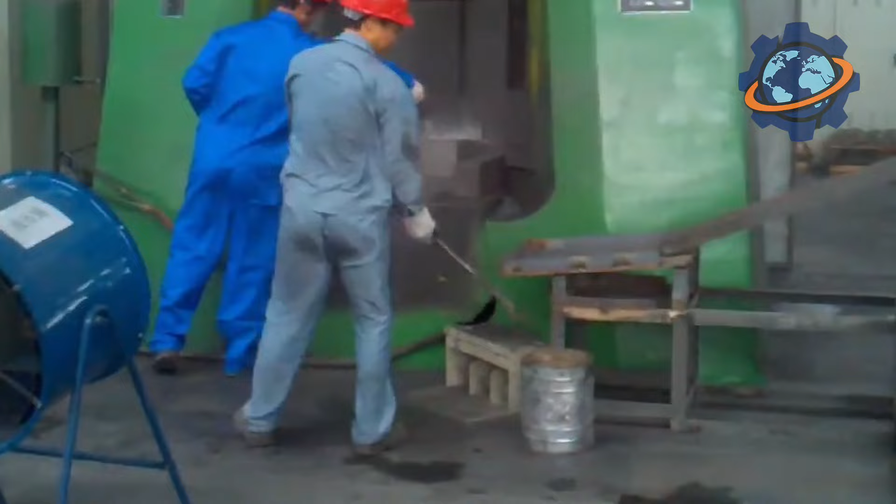Modern aerospace forgings require grain sizes smaller than 0.005 inches, with elongation ratios exceeding 10 to 1. Without precise microstructure control, components fail unpredictably during service, potentially causing catastrophic accidents. This technology race began during Cold War paranoia.

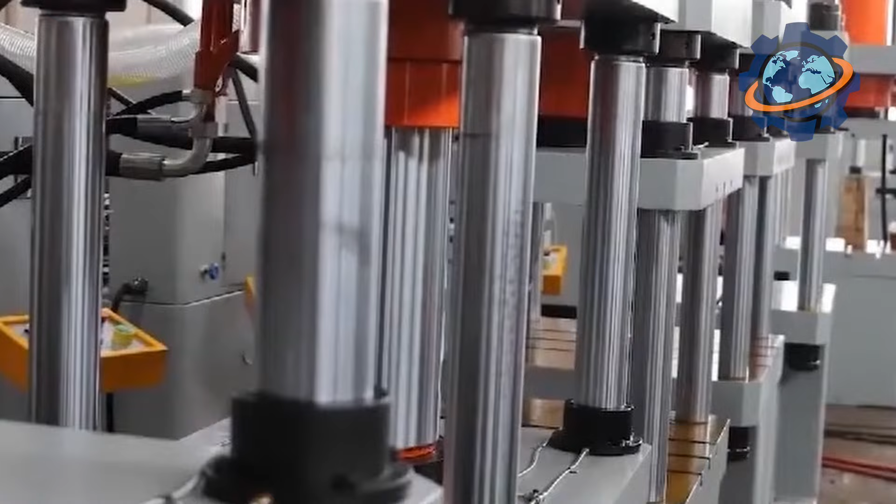The Air Force Heavy Press program built 12 presses between 1956 and 1959, including twin 50,000-ton giants at Alcoa and Wyman Gordon. These presses enabled Boeing 707 and later jumbo jets. Without them, aircraft manufacturers couldn't produce wings large enough. The strategic logic was brutal. Whoever controlled large forging capacity controlled aerospace dominance. Nations without heavy presses bought components from competitors, creating national security vulnerabilities.

China entered this arena late but decisively. Their 80,000-ton press, exceeding any Cold War relic, announced intentions clearly: aerospace independence. Today, China produces aircraft landing gear, rocket stages, and turbine components previously imported from America and Russia. The press paid for itself within 5 years through import substitution alone.

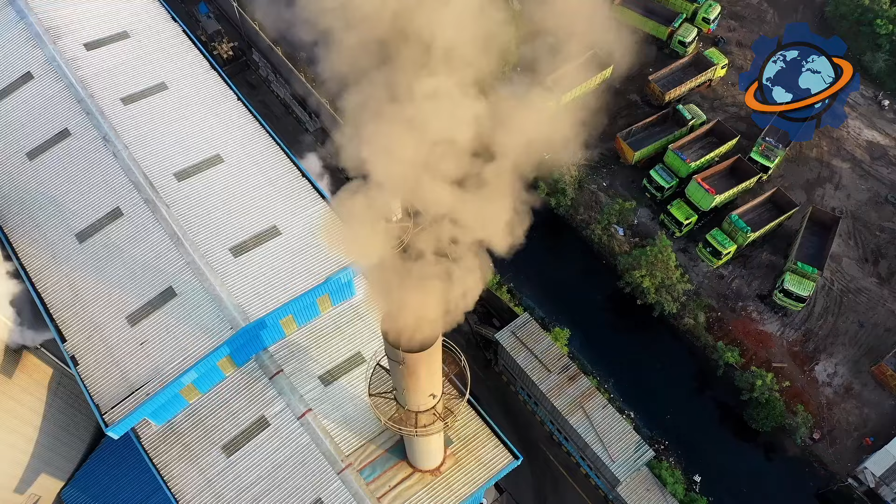Carbon emissions drop by 43% when forging replaces welded assembly in aircraft structures, eliminating welding energy and reducing weight through integrated designs. Industry saves over $32 billion annually through large forgings versus machining components from solid billets, which waste 90% of material as chips. Processing costs drop 61% because one forging operation replaces dozens of machining hours.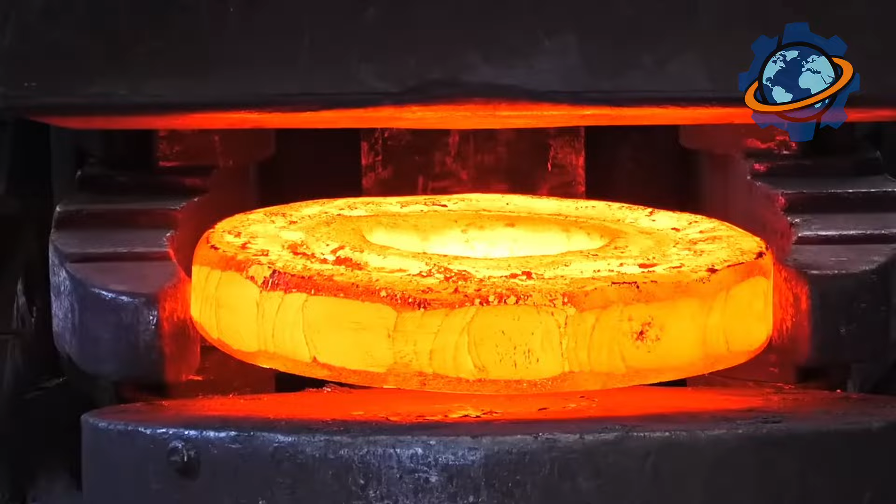So here's the secret promised: these monster presses exist because physics favors size. Larger presses forge larger components in single operations, eliminating joints where failures initiate. Every weld introduces heat-affected zones with altered crystal structures becoming crack paths. Every bolted joint adds weight and complexity. Seamless forgings eliminate these vulnerabilities entirely.

That's why the Airbus A380's wing ribs come from single forgings. No welds, no joints, just continuous metal flowing across 20-foot spans. From Cold War arms race to commercial aerospace dominance, the cycle completes. The 80,000-ton press represents more than manufacturing capability. It's geopolitical leverage. Nations with these machines build aircraft, rockets, submarines independently.

Nations without them remain customers, technologically dependent, strategically vulnerable. We've learned that industrial capacity determines global power hierarchies as surely as nuclear arsenals. That press standing in Sichuan doesn't just forge metal, it forges national sovereignty.

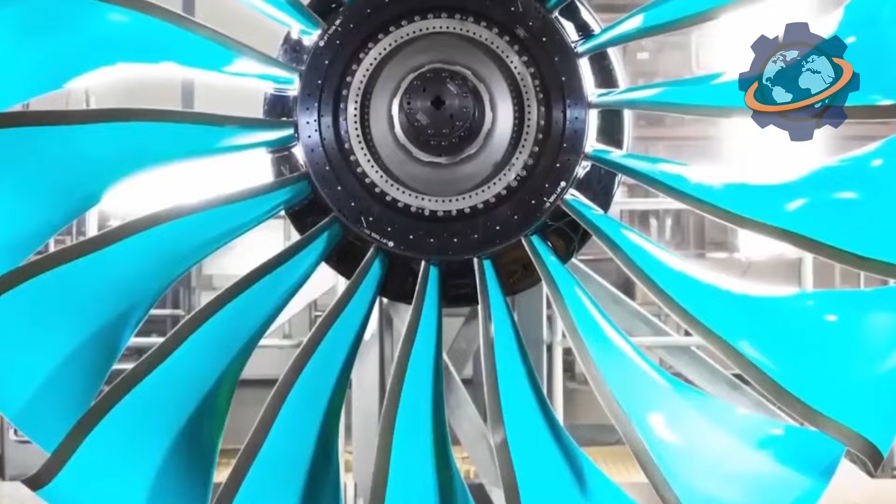Every second, jet engines spinning at 12,000 revolutions per minute thrust hundreds of passengers across continents. But here's what defies physics. Inside those engines, turbine blades made of nickel alloy operate at 3,000 degrees Fahrenheit, temperatures exceeding their own melting point by 200 degrees. Picture holding ice cubes in boiling water without them melting. That's the metallurgical miracle happening 35,000 feet above your head.

How does metal survive temperatures that should liquefy it? How do engineers grow crystals larger than your hand from molten metal? Stick around till the end, you'll discover the jaw-dropping secret of single crystal manufacturing that eliminated metal's greatest weakness, and why a single turbine blade costs more than your car yet lasts 20 years in literal hell.

The story begins in specialized foundries where clean room standards rival semiconductor fabs. These facilities maintain air purity of less than 100 particles per cubic foot, 10,000 times cleaner than normal atmosphere. Even microscopic dust particles cause catastrophic flaws in turbine blades spinning at speeds where centrifugal forces generate stresses exceeding 70,000 pounds per square inch. That's pressure crushing steel like aluminum foil.

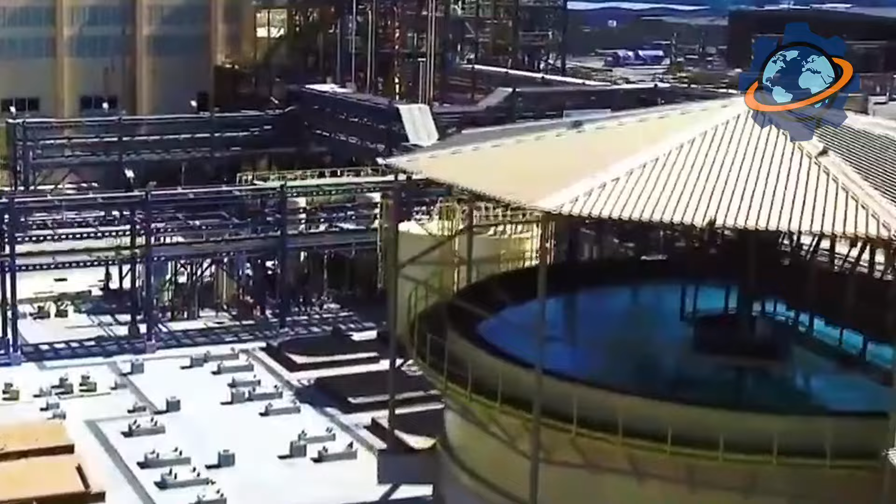Workers suit up in full-body cleanroom gear before entering casting halls. Inside, massive vacuum furnaces standing 2 stories tall and weighing 80 tons create environments replicating outer space. Vacuum pumps evacuate air until pressure drops to 1/1,000,000th of atmospheric pressure. At these conditions, materials behave differently. Impurities vaporize instantly. Gases trapped in metal escape, leaving behind purity impossible at normal pressure. Processing single batches costs $50,000 in electricity alone.

Next comes mold preparation, where ceramic shells, think pottery on steroids, get built layer by microscopic layer. Technicians dip wax patterns shaped like turbine blades into ceramic slurry 10 times, waiting hours between coats. Each layer adds thickness thinner than human hair. After 20 days of coating and drying, workers melt wax away in autoclaves, leaving hollow ceramic molds with internal channels more complex than human circulatory systems.

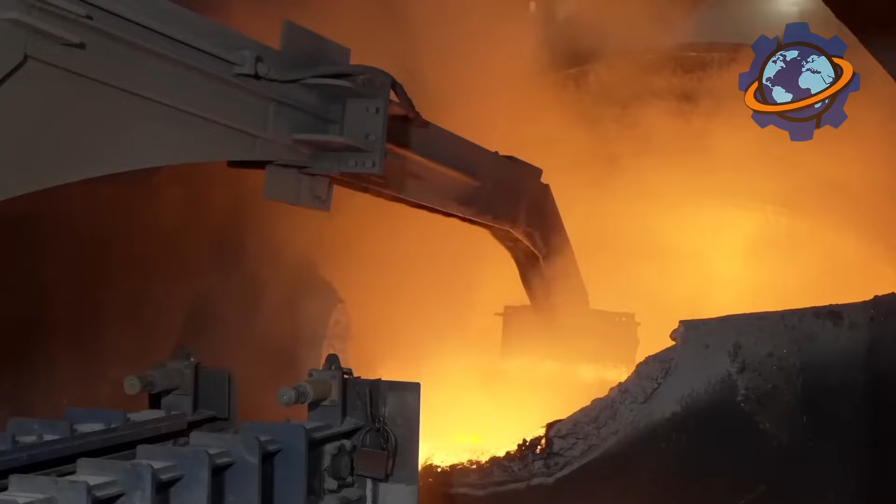These molds contain passages narrower than spaghetti strands, designed to cool blades from inside during operation. Some channels measure just 0.008 of an inch across, thinner than credit cards. Manufacturing these passages requires such precision that lasers verify every dimension. One blocked cooling hole means blade failure at 300 degrees lower temperature. That's the difference between safe flight and catastrophic engine disintegration at cruise altitude, scattering turbine fragments through the fuselage like shrapnel.

Giant crucibles containing nickel-based superalloy. Mixtures of nickel, chromium, cobalt, aluminum, titanium, plus 6 other elements in exact proportions. Heat to 2,700 degrees Fahrenheit. Picture liquid metal glowing white like miniature stars captured in ceramic containers. This superalloy, developed through decades of research, contains more expensive elements per pound than fine jewelry. A single turbine blade uses materials costing $800 before any manufacturing begins.

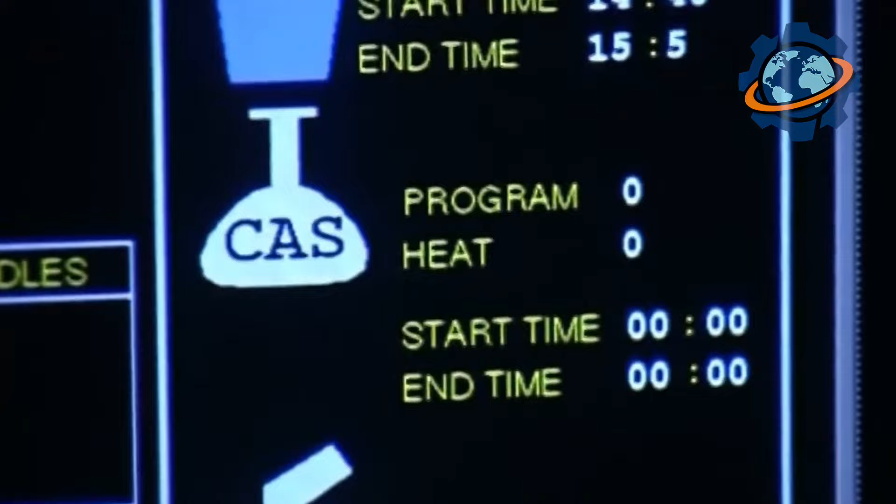Robotic arms lower ceramic molds into this molten inferno with precision measured in thousandths of inches. Timing matters critically here. Pour too fast, turbulence creates defects. Too slow, metal solidifies prematurely. Furnaces tilt at exactly 2 degrees per second, filling mold cavities in 17 seconds. During this pour, metal temperature drops 300 degrees, requiring computer-controlled heating to maintain consistency. One temperature fluctuation of 5 degrees ruins the casting, wasting months of preparation.

Now comes the magic, directional solidification. The filled mold sits atop a water-cooled chill plate at 70 degrees Fahrenheit while surrounded by heating elements maintaining 2,400 degrees above. This creates the steepest temperature gradient in metallurgy, over 2,000 degrees difference across 6 inches. That's transitioning from Arctic to volcanic conditions in the space between your thumb and pinky.

Slowly, incredibly slowly, a computer-controlled mechanism lowers the mold through the furnace at speeds of 6 inches per hour. Picture watching paint dry, then slowing that down tenfold. As the mold descends, metal solidifies from bottom upward in a razor-thin freezing front.

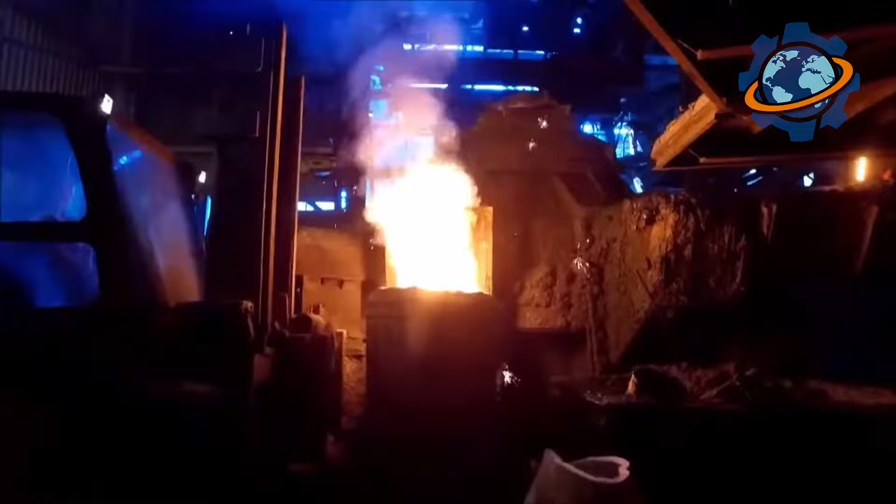This directional cooling forces crystal growth in one direction only, upward, eliminating horizontal grain boundaries where cracks normally form. The process takes 14 hours for a 4-inch blade. Rush it by even 10% and polycrystalline grains form, destroying blade strength.

But here's where physics becomes art. At the mold bottom sits a grain selector, a corkscrew-shaped passage so narrow only one crystal nucleus fits through. As metal solidifies upward, countless tiny crystals form at the chill plate. They compete, growing upward like metallic trees racing toward sunlight. Most hit the spiral walls and stop. Only the perfectly aligned crystal, the one matching the spiral's orientation, passes through this metallurgical gauntlet.

This step is critical because it ensures the entire blade, every atom from root to tip, belongs to one continuous crystal lattice. No grain boundaries exist anywhere. Normal metals contain millions of grain boundaries per cubic inch. Single crystal blades contain 0. Without boundaries, there are no weak spots where atoms slip past each other under stress. The crystal structure extends uninterrupted through the entire blade like a 3-dimensional molecular Kevlar vest, with atoms locked in perfect geometric formation.

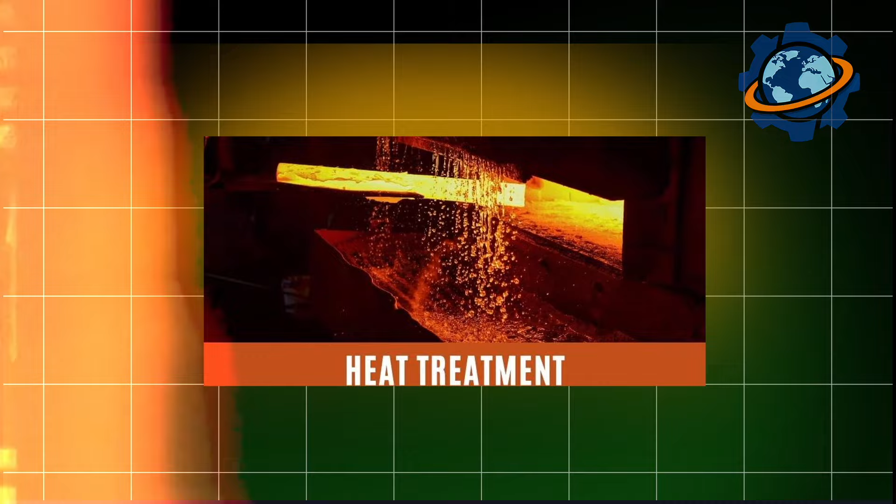After solidification, blades undergo solution heat treatment at 2,200 degrees Fahrenheit for 2 hours, then quench in inert gas. This locks crystal structure permanently and precipitates microscopic strengthening phases throughout the lattice. Next comes aging heat treatment, multiple cycles at precisely controlled temperatures that cause nanoscale particles to form. These particles, called gamma-prime precipitates, occupy 70% of the alloy's volume.

Picture this. Imagine a 3-dimensional checkerboard where hard particles pin the crystal lattice, preventing atoms from sliding. These precipitates remain stable at temperatures where other metals liquefy. They're the secret allowing nickel alloys to maintain strength at 3,000 degrees, temperatures where aluminum vaporizes, titanium melts, and even steel becomes taffy. The heat treatment process takes 96 hours of precise temperature control. Deviate by 15 degrees at any point and mechanical properties drop 40%.

Coating application transforms already sophisticated blades into thermal protection systems. First, a metallic bond coat, aluminum-rich alloy, gets applied via high-velocity plasma spray at 20,000 degrees Fahrenheit. Metal particles accelerate to twice the speed of sound, impacting the blade surface with such force they cold weld instantly. This creates a rough surface for subsequent layers while providing oxidation resistance.

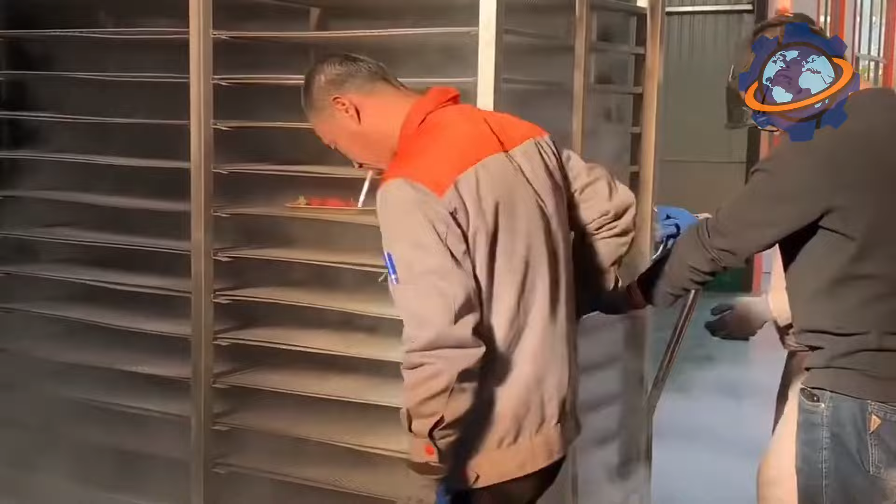Then comes the thermal barrier coating. Yttria-stabilized zirconia ceramic applied atom layer by atom layer using electron beam physical vapor deposition. In vacuum chambers, electron beams vaporize ceramic ingots. The vapor condenses on rotating blades, building up a coating 0.008 of an inch thick with a columnar microstructure full of microscopic pores. These pores act like thermal insulation, trapping air pockets that reduce heat transfer. The ceramic coating lowers blade temperature by 400 degrees, the difference between survival and meltdown. Modern engines couldn't exist without this coating technology.

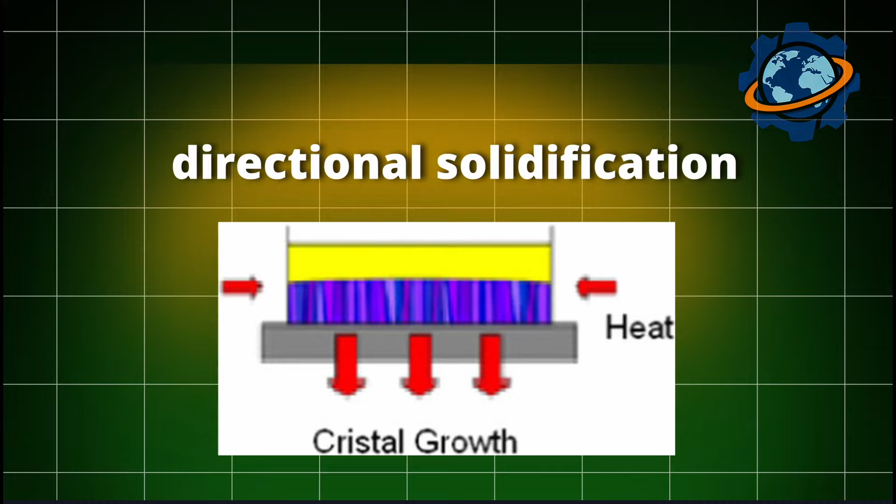This wasn't always possible. Back in 1940, early jet engines used cast iron turbine blades lasting 20 hours before failure. Temperatures barely reached 1,400 degrees Fahrenheit. The breakthrough came when Pratt & Whitney researcher Frank VerSnyder invented directional solidification in 1966, eliminating transverse grain boundaries and doubling blade life overnight. The true revolution arrived in 1982 when General Electric and Pratt & Whitney independently perfected single crystal casting. Turbine inlet temperatures jumped from 2,000 degrees to 3,000 degrees Fahrenheit, a 50% increase enabling massive efficiency gains. Modern turbofan engines achieve fuel efficiency triple that of 1960s designs.

Today, advanced engines like the GE9X powering Boeing 777X aircraft operate at 3,200 degrees, with pressure ratios reaching 60:1. These engineering advances cut aviation fuel consumption by 65% per passenger mile over 50 years. Carbon emissions dropped by 12% when replacing older turbine blades with modern single crystal versions in existing engines, equivalent to removing 18 million cars annually from global fleets. Airlines save over $47 billion yearly through improved fuel efficiency. Maintenance costs drop 58% because single crystal blades last 3 times longer than conventional ones.

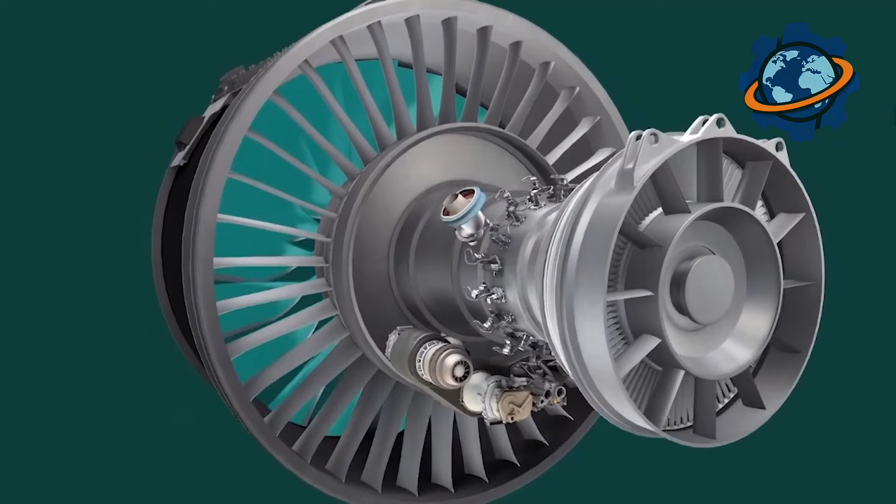So here's the secret promised. These blades don't actually survive above their melting point through material strength alone. They're actively cooled by air bled from the compressor, flowing through those microscopic internal channels at supersonic speeds. This cooling air, already compressed to 400 degrees Fahrenheit, seems hot by human standards but runs ice cold compared to the 3,000-degree combustion gases outside. Combined with ceramic coatings reflecting heat like mirrors, the actual metal temperature stays below 2,000 degrees, hot enough to glow orange but survivable. From molten metal to flying miracles, the cycle completes.

Single crystal turbine blades represent humanity's most sophisticated metal casting achievement. Objects where every atom's position matters, where crystal orientation determines survival, where manufacturing tolerances make computer chips look crude. We've engineered metal to survive in conditions nature never intended, creating materials that work at their physical limits. That's not just manufacturing. That's molecular architecture enabling the modern world's ability to shrink distance itself.